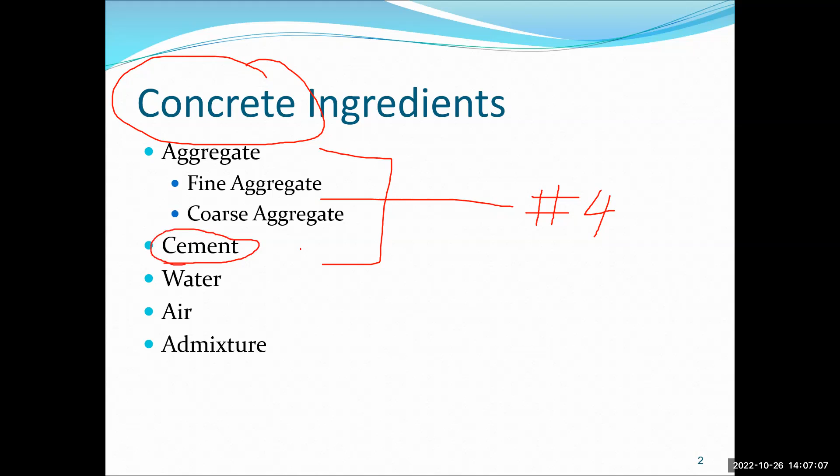But the next ingredient is cement. We can use Portland cement, and cement is the most expensive ingredient of the concrete. The reason for that is because we invest a lot of energy to produce the cement, not because the ingredient of cement is rare. No, the ingredient of cement is also available everywhere.

It is like a dirt cheap kind of ingredient. But the problem is that we have to invest, put on some energy to produce a chemically balanced material. So the money I'm spending on the energy transforms this ingredient into another kind of material that has somehow energy saved in the chemical composition of that material.

And guess what? Nobody pays money for water. Water is available everywhere, other than drinking water, and we are lucky here that we can get water from everywhere. It rains water, or we can dig in the ground and get water. So that's why this is also available everywhere.

Sometimes you can have air already in the mix, or sometimes what we do is add some kind of detergent in order to produce bubbles in the concrete. We call it an air entraining agent, an admixture to improve the performance of classical concrete in the face of weather, challenges, and pressure in the concrete to absorb pressure due to either osmotic pressure from icing, or hydraulic pressure from expansion of water in the concrete, or any alkali pressure or any kind of pressure. So the best way to handle this is to produce bubbles to absorb this kind of pressure.

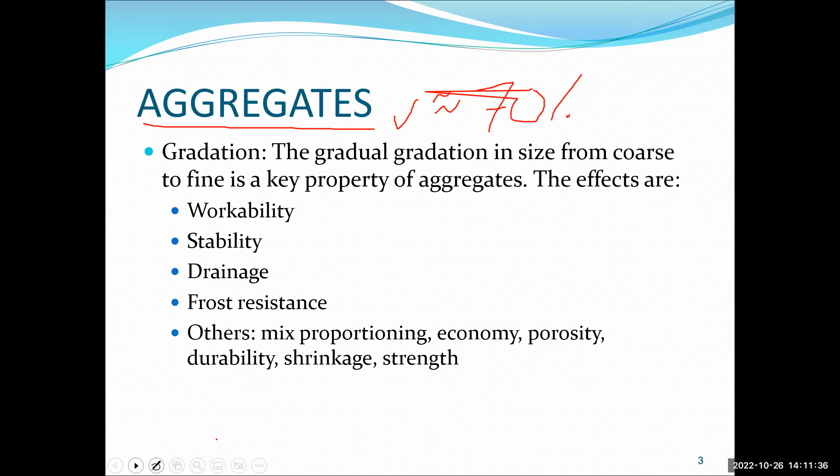The dividing line between coarse aggregate and fine aggregate is sieve number 4, meaning it has 4 openings per inch—each opening slightly less than a quarter of an inch. So this kind of proportioning between fine aggregate makes a big difference. In other words, in a mix design, most of the strength of the concrete comes from the contact of coarse aggregate to coarse aggregate.

About 80% of the strength comes from coarse aggregate to coarse aggregate friction. The fine aggregate contributes the rest, which is 20%. Now, if you have options in how much fine aggregate you can afford or use in a mix, try to be on the lower end of it.

That means do not exceed the maximum. To be on the safe side, use less fine than needed to fill the void. The reason is because overfilling causes damage to the concrete. You're already separating the coarse aggregate from each other, and you're minimizing the strength of the concrete, because too much fine aggregate reduces you to only 20% of the strength.

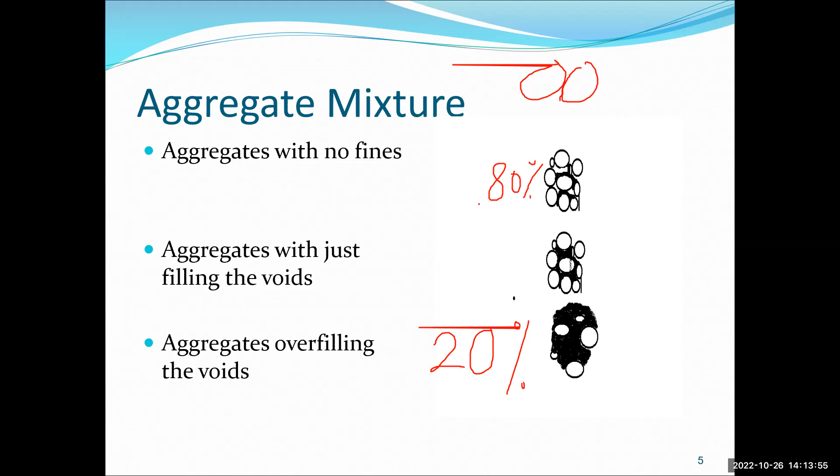This concrete that you produce with little or no fine is classified as well-drained concrete, a concrete that will survive under many internal pressures, such as hydraulic, osmotic, and other kinds of pressures.

Now, the best design mix is if you use fine aggregate enough, just enough to fill the void between the big particles, and that will give you 100% of the potential strength of the concrete. The key word here is: use fine aggregate enough to fill the void between the big particles. Less is not really good.

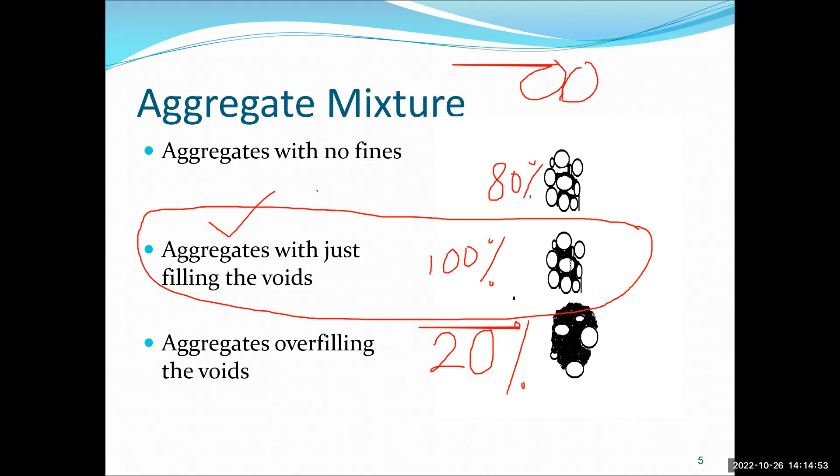More is not really good either. But to be on the safe side, less is better than more. This is something you probably want to keep in mind. This is a classical theory.

Now, another thing you probably need to look into is how freezing and thawing happens. The freezing-thawing cycle causes cracks in the concrete and accelerated damage because the aggregate itself has some pores in it. These pores get filled with water, and water expands approximately 9% to 10% of its volume when it freezes, unlike other materials.

When water wants to expand, it needs volume, it needs space. That's why, if the aggregate is fully saturated and doesn't have space, and this water is subjected to freezing, it's going to push against the paste, and that will create a crack. So the problem is if you have an aggregate here, and another aggregate beside it, and another one nearby, if there's pressure pushing against the paste, it will create a crack.

And if the other aggregate has the same kind of problem, these cracks will join each other. So we end up with cracked concrete all over, which causes rapid, accelerated deterioration of the concrete due to the freezing-thawing problem. The problem is water expanding when it freezes.

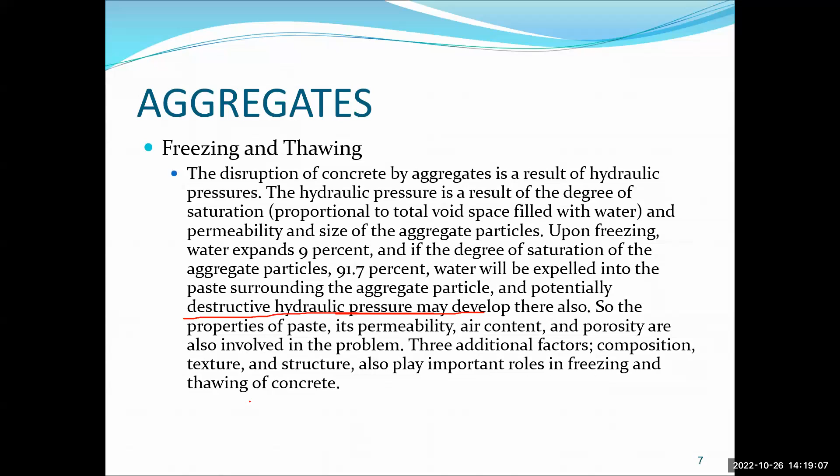Now, the next ingredient we said is the most expensive, because you're actually investing in the material ingredient of the cement by putting in a large chunk of energy. It's energy that's expensive here. Raising the temperature of the ingredient to 1500 degrees centigrade, or 2700 degrees Fahrenheit, is expensive.

What about the ingredient of the cement itself? It's available everywhere. You can make it if you want to, if you can raise the temperature to 1500 degrees centigrade or 2700 Fahrenheit. It is silica and lime. These are everywhere - the lime, which is calcareous rock, is basically made of calcium carbonate, which is the chalk that you see. It's available everywhere.

No one can monopolize that. You can find calcium carbonate, which is the ingredient for lime. Silica - you can go to the beach and collect it for free. If you put a handful of sand from the beach in your pocket, nobody's going to stop you and say you're stealing the beach sand, because it's free. It's not an expensive ingredient. You can also add clay to the ingredient of the cement - it will contribute the aluminum and iron content needed in the chemical composition of the cement.

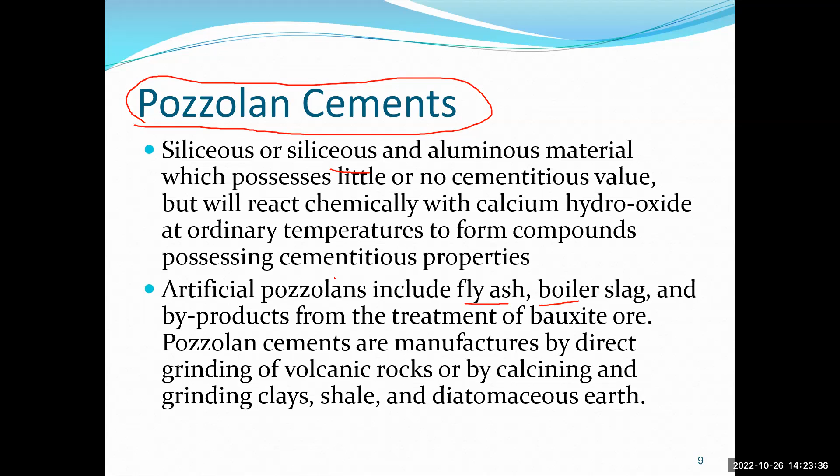Now, water is available everywhere, but we need to use water that's not contaminated - water that's applicable and useful to the concrete, not harmful to it. A rule of thumb says any water that has total dissolved solids less than 2,000 parts per million is safe to use without testing it.

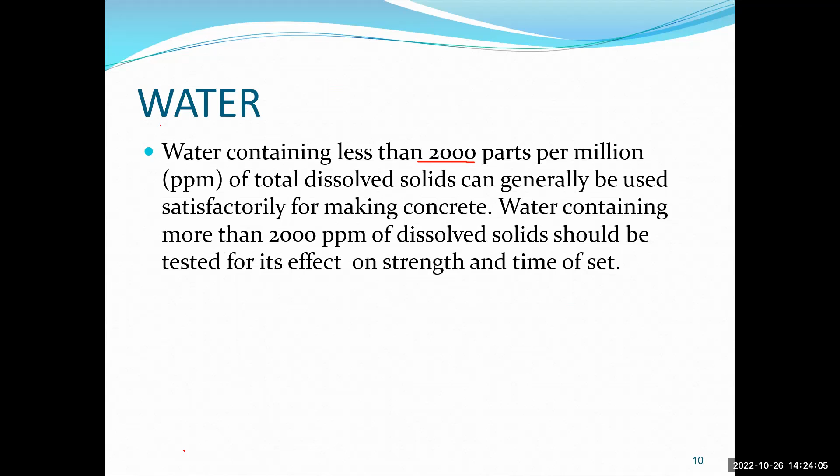Beyond 2,000 parts per million of water, you need to test it. In some countries we have plenty of water; in others, water is really scarce. People don't have water to drink, much less to use in concrete, so they'll resort to contaminated water sources. Now, tap water usually has total dissolved solids somewhere between 400 to 1,200.

Most likely about 600 to 700 total dissolved solids, and it is really safe to use tap water in the mix. Now, air entraining agent - remember when we talked about pressure inside the concrete, the classical solution for this internal pressure comes from providing air bubbles in concrete. How do you provide air bubbles?

Any detergent will do it, but we use industrial detergent, which produces many little bubbles. That's why it's recommended to use air entraining agent in case the concrete is subjected to internal pressure, like freezing and thawing. Freezing and thawing happens because water expands and increases in volume, producing pressure. That's why if you want to absorb the hydraulic pressure due to freezing water, add air entraining agent.

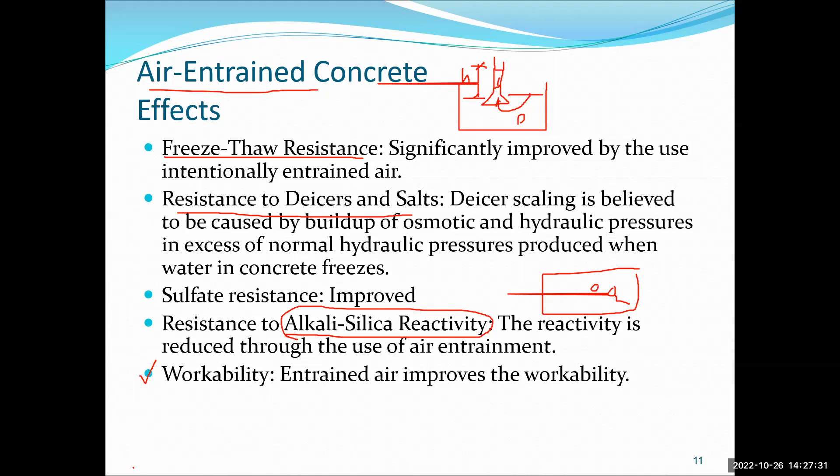You know why? Because you're actually adding detergent, adding soap - literally any detergent will do it. When you put soap in your hand, it becomes slippery, and that's why it becomes easy to work with. That's why it improves workability. So adding air in the mix improves workability and reduces the risk of accelerated damage to the concrete due to internal pressure.

Now we have admixtures, or additives, we can add to the concrete to improve its performance. One of the admixtures we talked about is air entraining agent - it improves durability in environments of freezing, thawing, icing from salt, and sulfate and alkali-silica reactivity. How do we use it? We use salt of wood resin, or you can use synthetic detergent, that will do it. Water reducing agent...

The reason we need a water reducing agent - in the classical school of thought, the water-cement ratio matters. If you plot water-cement ratio against strength, the more water you add, the less strength you have. So you need to use the minimum water you can live with, to reduce the water demand. When you reduce water demand this way, you're actually increasing the strength of the concrete.

Some examples we can use are lignosulfonate, hydroxylate, carboxylic acid - these are examples of the chemicals we use. Retarders, we need to slow down the setting time - we can use materials like borax, or any materials that will delay the chemical reaction. Accelerator is the vice versa - I need to speed up the chemical reaction, especially in cold weather.

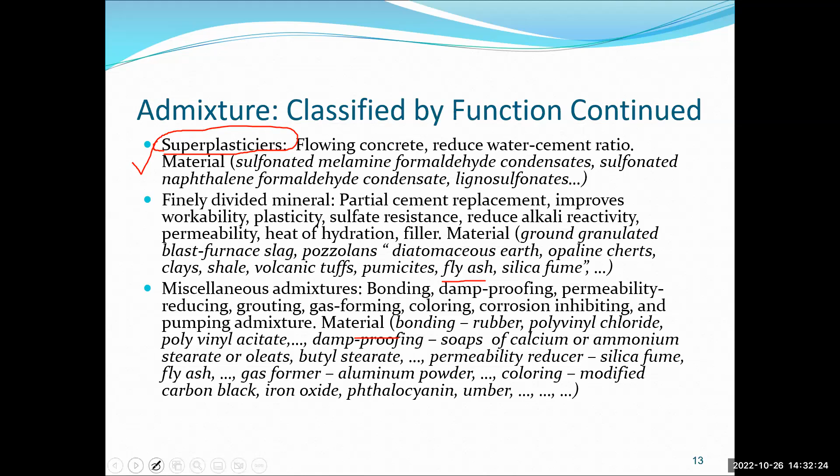Now we talk about fresh concrete. Once you have the ingredients ready to be mixed, you put them aside and start mixing. The thing you need to worry about is workability. Workability for fresh concrete is an extremely important property - how easy you can work with the ingredients, how easy you can transport the concrete, how easy to finish the concrete. We call this workability.

Workability is very critical because you need the concrete to flow in the forms, to wrap itself around the reinforcing bars, to reach every corner of the form without any problem. Otherwise, you'll have problems with the hardened concrete. That's why workability is very important, very critical.

Things that affect workability: water content. Definitely if you increase the water, what happens to workability? It will increase. But what happens to strength? The strength goes down. This is not good.

Air entraining agent improves workability because it's soap. If you increase the air entraining agent, what happens to workability? It will increase. Not only will it increase, but the strength will also be improved, the performance of the concrete will improve, and stability will be improved. That's why it is good to have air entraining agent in the concrete, according to the classical point of view.

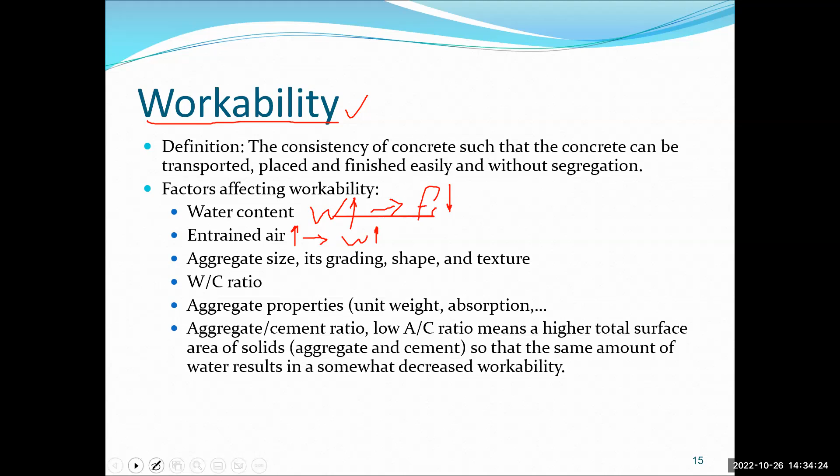Aggregate properties - unit weight, absorption, and aggregate cement ratio - all of these affect workability. How do we measure workability? Many ways, but the best and most common is the slump test. The rest you can see everywhere but they're not very common. Next would be the Kelly ball penetration test. The slump test is straightforward to do, and here's how we measure it.

This is a slump test. It is like an inverted cone. The diameter of the cone at the bottom is 8 inches and 4 inches at the top, and the height of it is 12 inches.

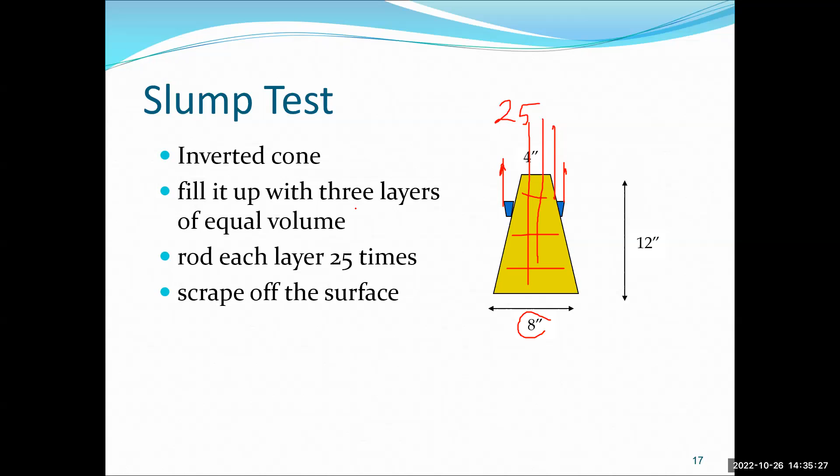So what you do in this case is fill it up in 3 layers and tap it with the rod 25 times. This is very common. So you fill it for the second layer and tap it with the rod 25 times. And you fill it with the third layer and tap it with the rod, in this case, 25 times. So at the end, you level the top and then pull the cone upward in 5 seconds. And then this concrete is going to slump, and that will give you a measurement of workability.

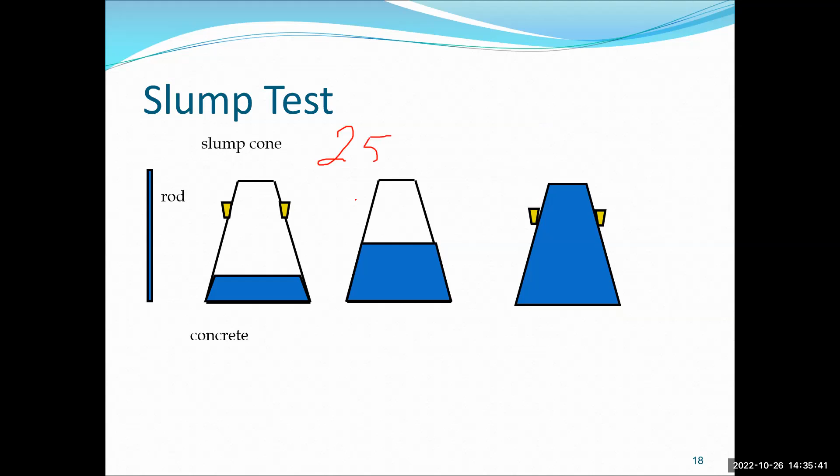That's how it looks like. See that? You put first layer, second layer, third layer, tap it 25 times each time. And then level the top and lift it up. Lift it up nicely and smoothly. And then what happened? You measure how much the concrete slumps. This is the slump measurement here.

Obviously, if the concrete is fluid, then it's going to slump more, right? If the concrete is rigid, it will slump less. Make sense? So that's why this distance that the concrete slumps is a measurement of the fluidity, the workability of the concrete.

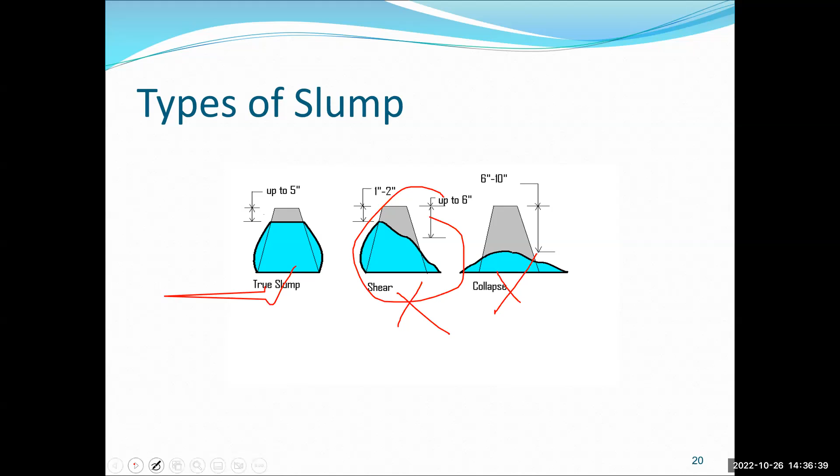Now, setting is the time the concrete sits and hardens because of the cement itself. What is this, the setting? It's a stiffening of the paste, because what happens is that the paste is going to bind the ingredients together - is it going to bind the fine aggregate with the coarse aggregate? That's why it is important.

Now, setting - there is a period for the chemical reaction, or the majority of the chemical reaction, the most significant chemical reaction of the concrete is, in this case, approximately 45 minutes without any additives. Make sense? With additives it will be different. So the concrete will sit and harden in 2 stages, we call it. The initial setting takes about 45 minutes to an hour somewhere,

with the concrete that has no additive in it. And the final setting is approximately between 2.5 hours to 3 hours. Do not agitate the concrete between initial setting and final setting. So you have 45 minutes to work with the concrete - form it, transport it, put it in the forms and so on, and create it, vibrate it, do whatever, in about maybe half an hour. Leave it alone for another 2.5 hours. Don't touch it, because agitating the concrete in this critical time will break the bonding, which is very delicate and vulnerable. Don't do it. So you need to stop.

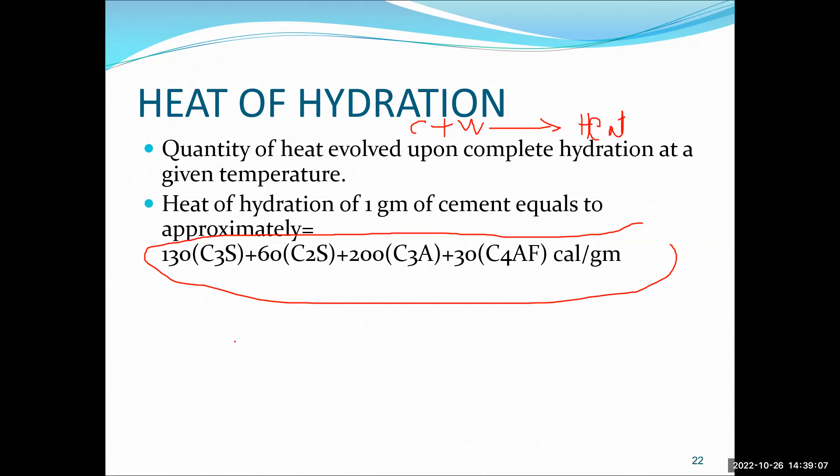And the heat of hydration - this is one of the best equations we use, in terms of calories per gram of cement: 130 calories per gram of cement for C3S, the main component of the cement, 60 for C2S, and 200 for C3A. But between these two, they are the major chemicals here - approximately about 80-85% of the cement.

Bleeding - concrete bleeds, and bleeding is healthy. Concrete is supposed to bleed. Bleeding means that you have a shiny surface on the concrete. If you see a shiny surface on the concrete, then the concrete is healthy and bleeding. Now that means it has not reached the final setting yet. This kind of shiny surface on the concrete tells you the time is somewhere between initial setting and final setting. Do not agitate the concrete or work with the concrete as long as you see a shiny surface on the concrete itself.

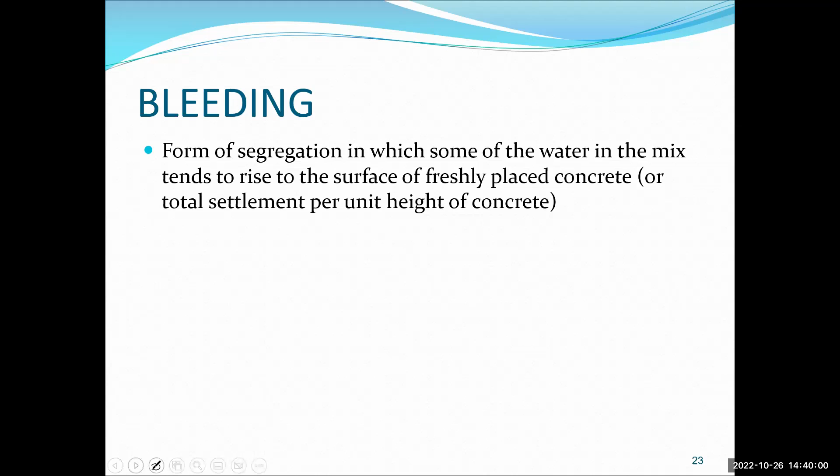Otherwise you'll be breaking the most vulnerable bonding that the concrete is doing. Here's what happened: you look at this bleeding surface on the concrete, there's some bleeding, like a layer of water and cement. This is the best layer in the concrete, this kind of layer between water and cement. Some of this water will evaporate and some will come back to the surface, mixed with very fine particles of cement. If it dries out, it forms the best protective layer to the concrete. So do not remix it, do not agitate it, do not disturb this bleeding layer.

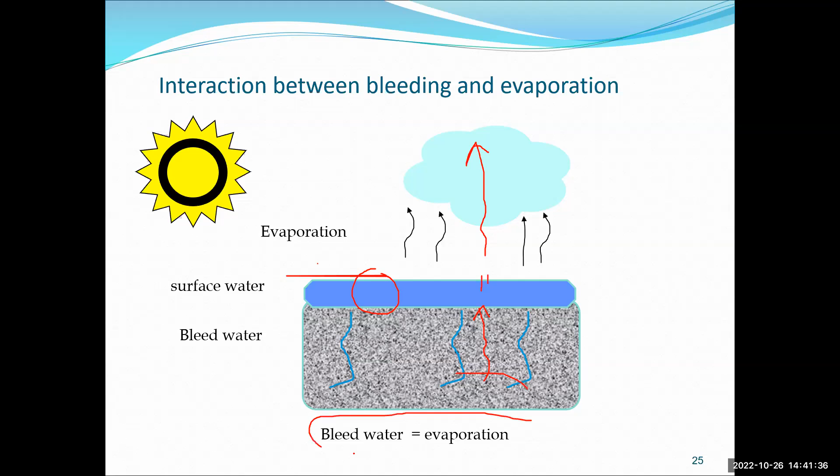So what you want to do is this: examine this layer. The best scenario is if the amount of water going in equals the amount of water you're losing due to evaporation, maintaining this thickness of layer until the end of the final setting. Once the concrete gains enough strength, they can work on the concrete after that. So whenever the bleeding water equals the evaporation caused by heat and temperature, depending on where you are, you're creating a perfect, strong protective layer on the concrete.

Now let's talk about mixing and proportioning of the concrete. Here's what we do in mixing it. Now you have the ingredients, let's work on mixing them. The thing you need to remember is, what is concrete? Concrete is a composite material.

We say composite because we make the concrete from different ingredients: the cement, and aggregate, which can be anything, sand and gravel. That's why it's composite, composed of the cement, or binder, the best binder we have nowadays, which you can find in hardware stores, is Portland cement, the star of cement. This is the binder, and the rest of the ingredients are sand, gravel, and water. So this is just to remind us these are the ingredients of how I make the concrete.

Now, hydration is a chemical action triggered by adding water. When you add water, the chemical action starts, and bonding starts between the ingredients of the concrete. This chemical action converts all these loose ingredients into a solid, man-made rock, bonding all the ingredients together. So this is the hydration process.

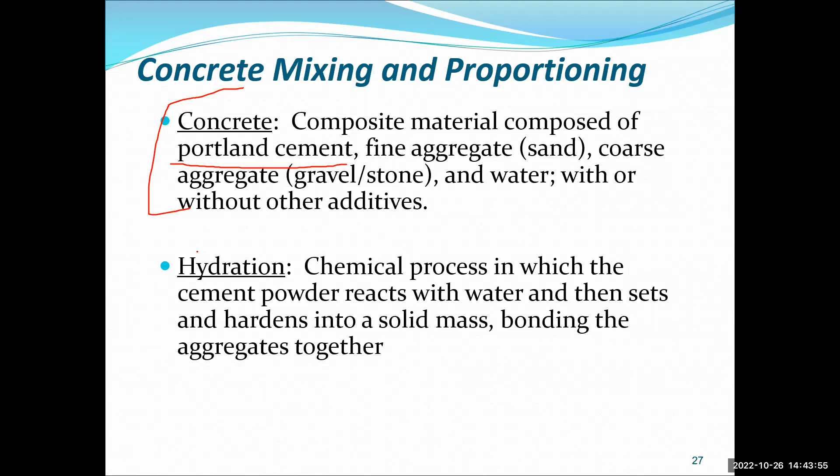A lot of people think it's a simple process, anybody can do it, just add water at room temperature, done. But yet it is a very, very complicated chemical action. It's not a simple chemical action, but it is a simple process.

Now, what we do in mixing is design the mix, to produce the best product at the very end, which gives you good strength and good durability. You design the proportioning of the ingredients: how much cement, how much sand, how much gravel, how much water, and mix them all together. You target the best mix design to come up with the best outcome, mostly targeting higher strength, because you build bridges and buildings out of concrete to take care of the loads on these structures.

You need higher strength, you need good workability, and you need the cost to be reasonable, to minimize cost, because you are in competition, and nowadays the competition is all over. In the past 25 years there wasn't much communication between the world; now we have good networking and communication, which makes competition very high. The demand to reduce costs and be more effective is very high.

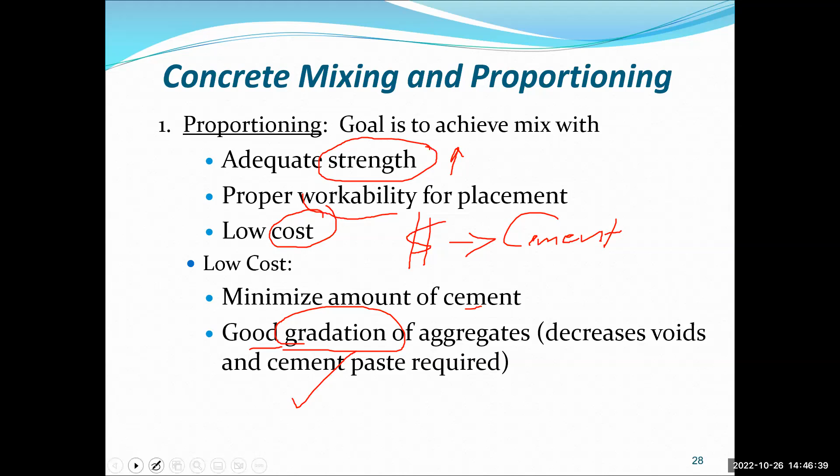So we minimize the amount of cement and make sure you have good gradation, because one of the trickiest ways to improve strength cheaply is to work on the gradation of the aggregate itself. That will give you the best kind of gradation.

Increasing the water cement ratio will increase plasticity and fluidity, but it reduces the strength due to larger voids. Not only larger voids, but also because of too much excessive water in the concrete, and any excessive water left in the concrete does nothing but damage, damage, and damage.

Remember that. Here's a secret: in normal circumstances, for the hydration process, you need approximately a water cement ratio of 0.23. Okay, that's the water cement ratio needed.

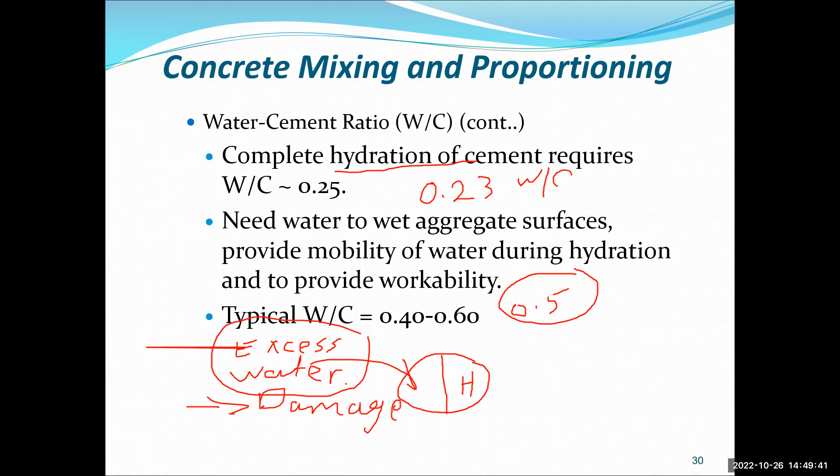So the tricky part is how can we reduce the excess water to improve the strength of the concrete? Keep that question in mind. We're trying to reduce excess water, reduce shrinkage and shrinkage cracks, increase the strength, and at the same time reduce the voids in the concrete.

So in the design of concrete, you have a major principle to worry about: quality. You need quality concrete, because when you mix it, you target the quality. Get the best mix that gives you good quality, good workability, and low cost. These are the major targets when designing the mix and proportioning the ingredients. Keep in mind these are the three things you have to have.

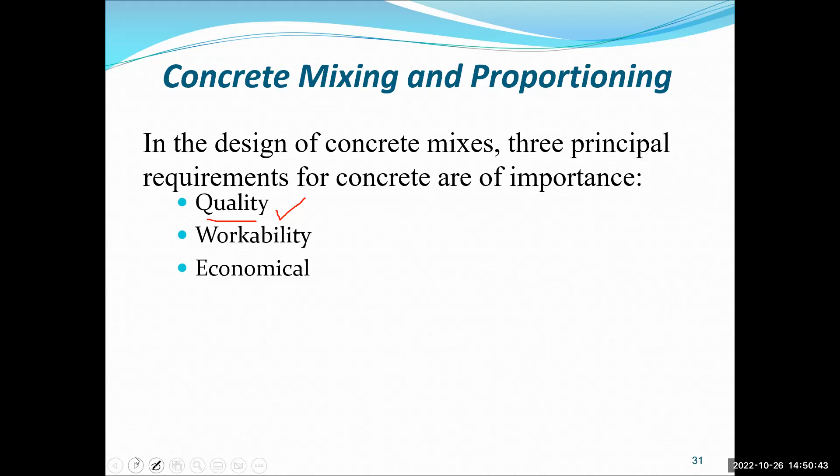Now we talk about, once you mix it, the hardened concrete. Now the concrete sits and hardens. What you want to do is look at the properties of the hardened concrete. The major property of hardened concrete is the strength. You need a stronger concrete, so we need to test it in terms of strength.

All kinds of strength: compressive strength, shear strength, tensile strength, flexural strength. You want to make sure the final product is strong enough to take care of the loads on the concrete. Elasticity, water tightness, resistance to destructive agency, volume changes, creep, extensibility—all of these are important properties when we deal with hardened concrete.

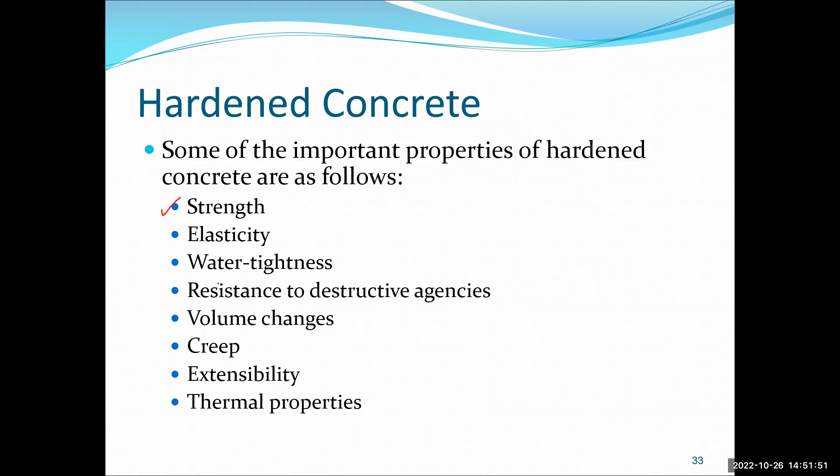Now, when it comes to strength, compressive strength is number one, and probably the only one we are obliged to test—the only one required by code is the compressive strength, which we call FC prime. FC prime is basically the maximum load a cylinder can take over its area.

So what happens is we take cylinders—normally standard cylinders that are 12 inches high and 6 inches in diameter. This is the standard cylinder size we use for testing.

Now what happened is that we started using this 6 by 12 cylinder, but most DOTs now use 4 by 8.

Take this cylinder, put it in a machine, and apply load on the cylinder. It's going to break most likely by shear. This is the maximum load it can take. If you take the cross-section area here, then FC prime, the compressive strength, will be this maximum load over the area.

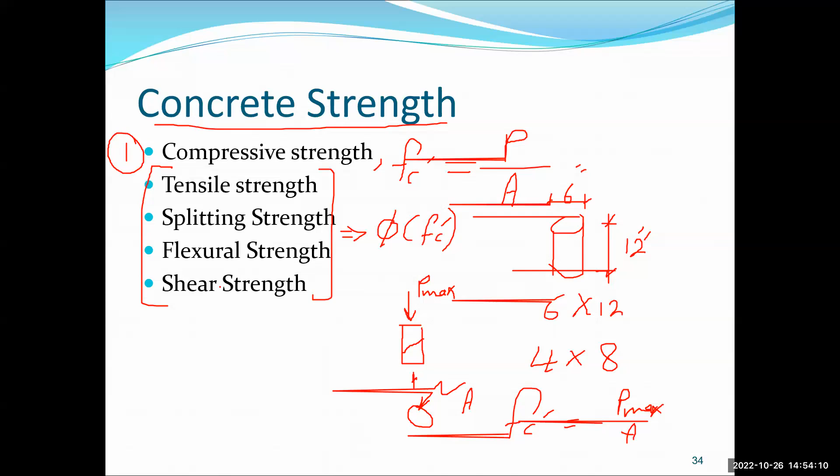Now the tensile strength is also needed. Tensile strength, splitting strength, all of these are expressed as a function of FC prime. So once you know FC prime, you can tell the tensile strength, splitting strength, and other kinds of strength.

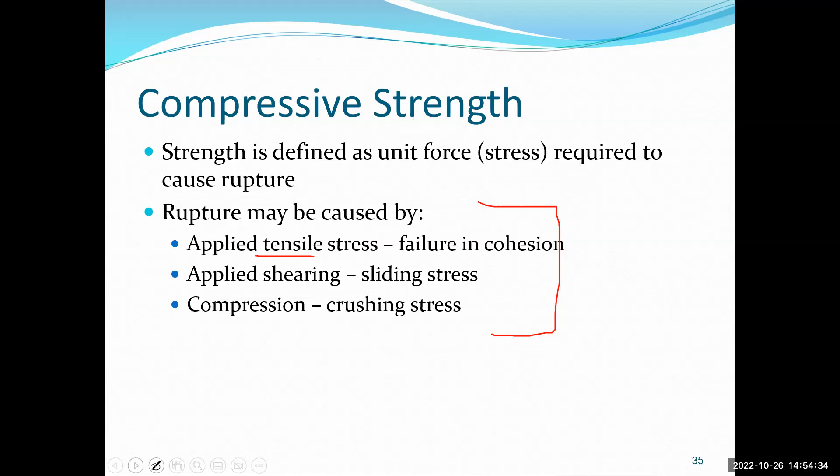Now, the compressive strength - if you put the sample in a machine, there are 3 typical modes of failure. One is failure due to cohesion, like tensile stresses, or shear, or compression - the way it breaks. In tension, if you put the sample in a machine, the failure will be like a load this way. For shear, the failure will look like a cone, like this. And for compression, of course, crushing.

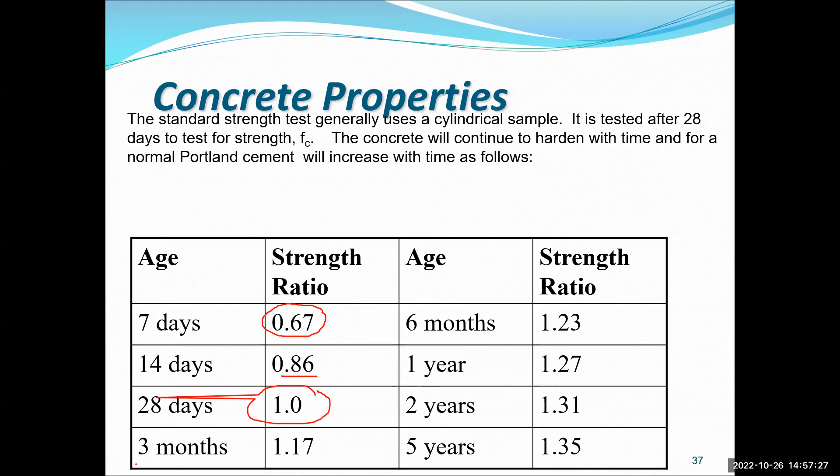Now, look what happened. From 6 months to 1 year, it only gains 4.04% or 4%, right? So we can tell the rate of increase in strength reduces with time substantially. But theoretically, we can say that concrete gains strength forever. That's how it looks - it gains strength very sharply at the very beginning.

Then the rate of increase decreases, and becomes almost flat, but theoretically, the gain in concrete strength will be infinite. The concrete will gain strength infinitely as long as it's not subjected to harmful chemicals or harsh conditions.

Now again, we express the tension, the shear, all of this in terms of the compressive strength. And as a rule of thumb, the compressive strength of concrete compared to the tensile strength - rule of thumb, tensile strength is 10% of the compressive strength. See how weak concrete is when it comes to tension? Concrete is extremely weak when it comes to tension.

Extremely weak, very low percentage, according to the formulas you can find in codes and other literature. The tensile strength is expressed as 5 times the square root of FC prime. This is one of the best formulas to relate the tensile strength with the compressive strength.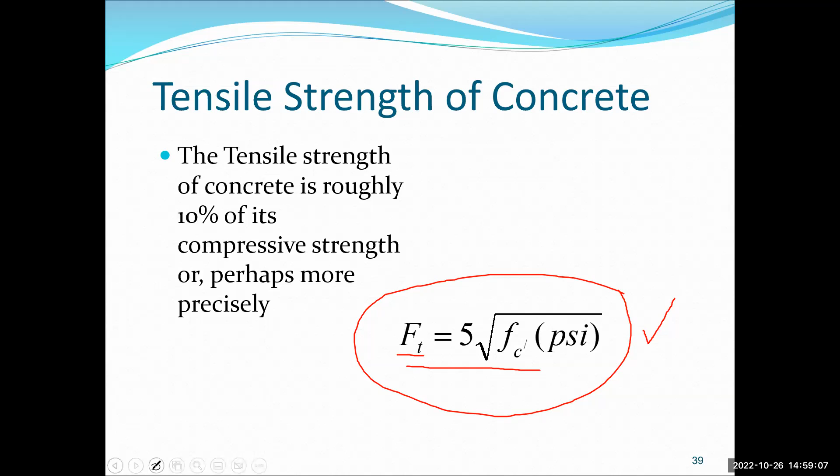Now, when it comes to the flexural strength, what we do is use it in a beam. If you have a simply supported beam like this and you load it, the top will be subjected to compression and the bottom will be subjected to tension. So that's an indirect way of measuring it.

This is the neutral axis here. So this is an indirect way of measuring the strength of the concrete. This is the concrete in compression, and this is the concrete in tension.

Now once the concrete beam breaks, subjected to this kind of loading with one load or two loads, it's going to crack here. That means it reaches failure caused by tension, and this tension is what caused the crack or failure. We call it modulus of rupture.

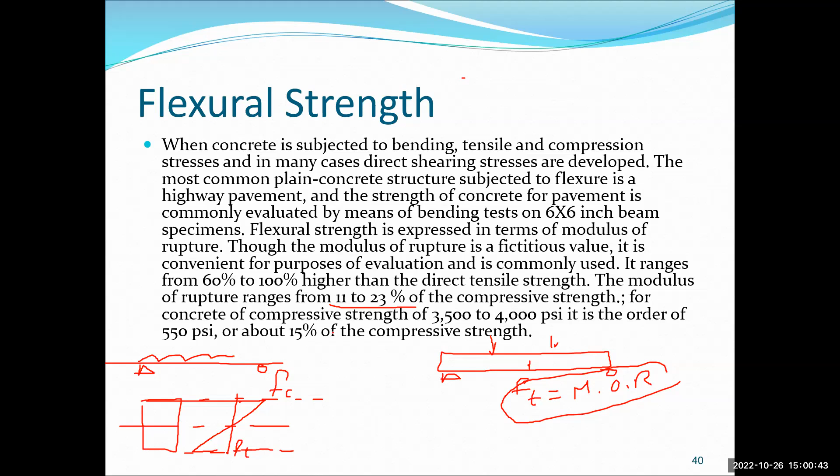Modulus of rupture is a tensile, indirect measurement of the tensile strength of concrete in flexure. It's approximately 11 to 23% of the compressive strength. According to ACI, the flexural strength of the concrete is approximately 7.5 times the square root of Fc prime.

The setup of the experiment is as follows. We apply a load P, which will be P over 2 on both sides. Now if you do some derivation, the tensile strength will be MC over I, and C for the concrete will be equal to H over 2.

The moment of inertia I in this case will be equal to 1/12 of the width times BH cubed. If you put this all together, you end up with the modulus of rupture FR equal to 6 multiplied by the moment. The maximum moment for this scenario would be equal to PA/2, where A is this distance here.

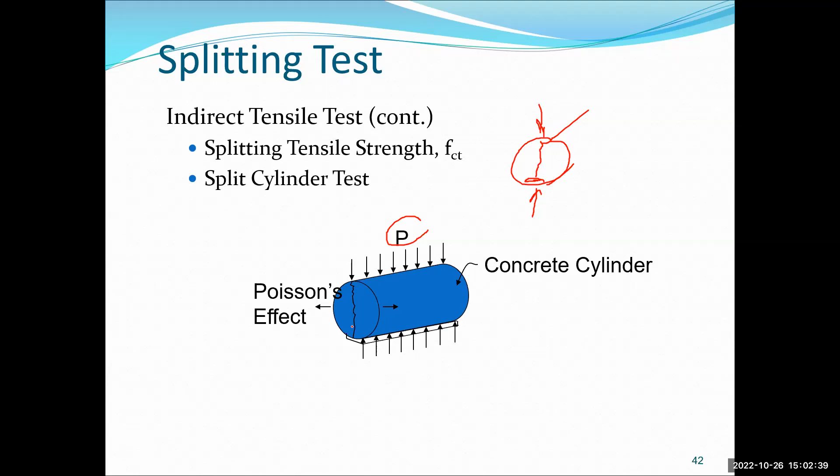Now there's another indirect way of measuring the tensile strength, where you put the cylinder on its side and apply a linear load. According to Timoshenko, this will fail by the Poisson's effect. You have the cylinder here, exactly like a watermelon: if you push with a compressive force, the watermelon goes into tension. Part of it will be in compression, but most of it will be in tension. That's why the cylinder breaks very nicely, almost in the middle, and splits. That's why we call it splitting strength.

According to Timoshenko's derivation, the splitting strength here is 2P over pi LD, for a standard 6 inch by 12 inch cylinder. The length is 12 inches and the diameter is 6 inches.

Now according to studies and research, the splitting strength of the concrete expressed in terms of Fc prime is approximately 5 to 7 times the square root of Fc prime, most likely equal to 6.7 square root of Fc prime. Notice that Fc prime is expressed in terms of PSI.

Shear strength is another strength that we target, when two planes that are parallel and equal have a tendency to slide relative to each other, and that will cause shear in the concrete.

Shrinkage and creep are of course one of the major problems of concrete. It shrinks because it loses moisture, and losing moisture leaves voids, which is why it shrinks. Shrinkage is due to water loss to the atmosphere. Plastic shrinkage occurs when the concrete is still wet, and some of the water is used for the hydration process.

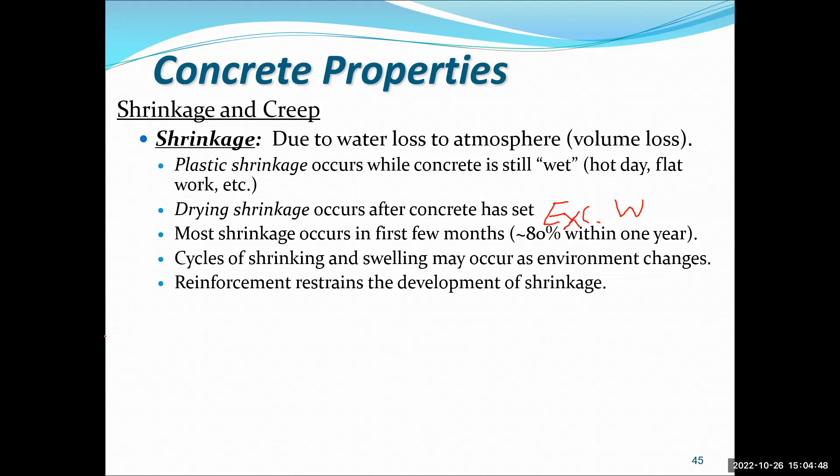When the excess water is leaving, most of the shrinkage happens in the first few months, about 80% within 1 year. The cycle of shrinkage and swelling depends on the moisture content in the concrete. You want to reduce shrinkage as much as you can, because shrinkage is one of the major causes of cracks, so it is not a healthy property.

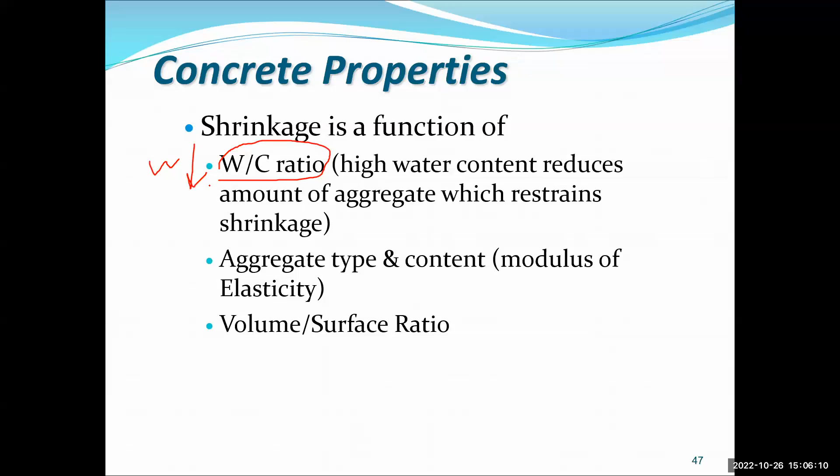It's not healthy to have a concrete that has a high percentage of shrinkage, so you want to reduce shrinkage as much as you can. To reduce shrinkage, you need to reduce the water cement ratio and reduce water. You need to use aggregate content with low modulus of elasticity, which in this case has the least absorption. You also need to consider the volume to surface ratio, which will reduce the amount of shrinkage. Shrinkage is not something we can tolerate very often, because it's a major source of crack generation, producing unsightly cracks that cause defects in the concrete.

Shrinkage is also a function of the type of cement used. Sometimes we don't question the cement type, whether it's certified as Portland cement Type 1, but shrinkage is related to it because hydration involves absorbing or using water in a chemical reaction, making cement a major factor. The admixture used is also significant, especially superplasticizer, which reduces water demand. Reducing water demand reduces the amount of water, which reduces shrinkage. Typically, strain due to shrinkage is between 200 to 600 micro strain, which is a big amount.

When it comes to shrinkage, sometimes we have drying shrinkage for slabs and concrete. The top surface dries faster, and if it dries faster, the top will curve upwards. For a slab on grade, this means it loses contact with the ground, and when the tip is subjected to load, it will create a crack on that side. This is what we call a moisture gradient.

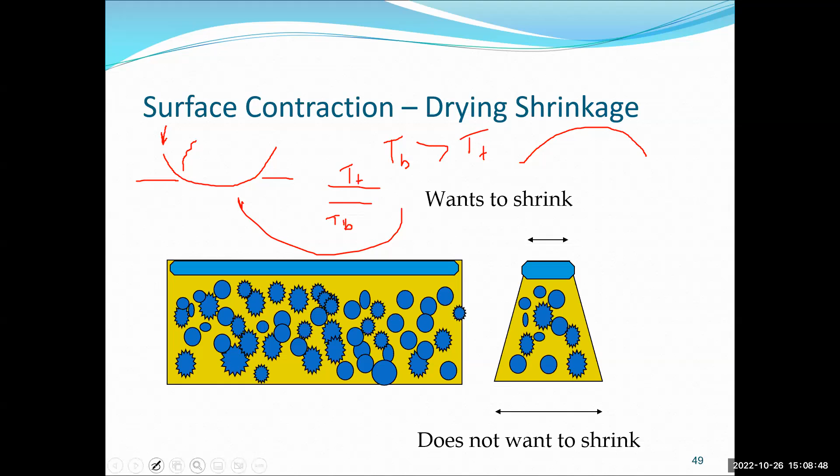This is typical shrinkage - the concrete loses moisture. Sometimes if you restrain the shrinkage, that creates cracks and unsightly cracking. That's why we need to control where the cracks are going to initiate. The best way to do this is to not restrain movement of the concrete beams or concrete slabs.

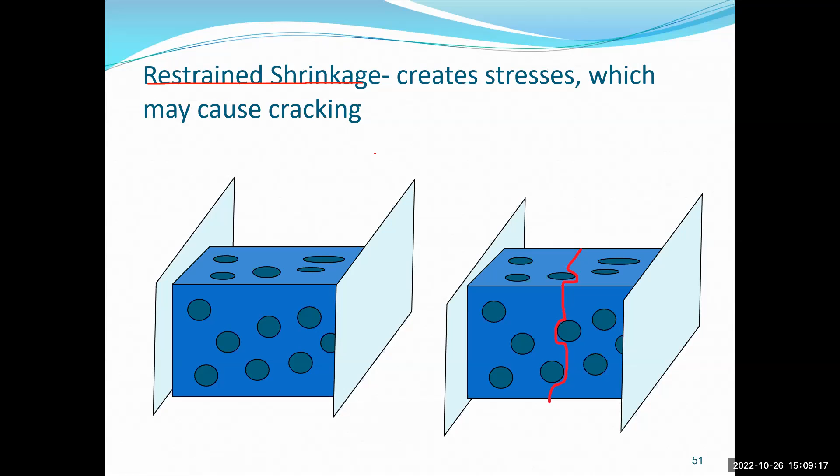Here's another example: with restrained shrinkage, you see parallel cracking approximately 8 to 10 feet apart. This happens because you are not providing the concrete the freedom to move. If you restrain it, you start creating parallel cracks approximately 8 feet apart. That's why when we cast a slab on grade, we put plastic sheets on top of the gravel, which minimizes the contact and bonding with the aggregate.

Now let's talk about defects of concrete. A major defect is cracking, whether due to load or due to losing moisture from shrinkage. One thing we need to worry about is reducing the amount of cracks, which requires designing the mix properly and designing the concrete members properly. But cracks result in many different ways.

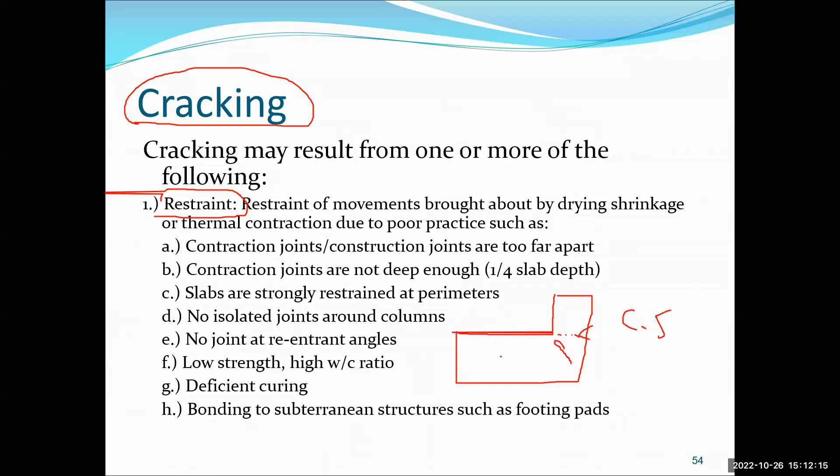Now, because of thermal expansion and contraction, you have to worry about these things. For example, if you're casting a slab that looks like this, notice that if you do not make some kind of construction joint, the concrete will crack this way. Makes sense? That will be unsightly. Now, if you have a column in the center here, and you do not have a joint there either...

Then the concrete will, in this case, crack around it, because the concrete bonds to the column. Of course, if there's a wall here, for example, if you do not make a separation or isolated joint here, because you have to make isolation at the column, isolation here, then the concrete will bond and cause a crack at the side.

So if construction joints are too far apart - sometimes what happens with slabs, you have to make them approximately 20-25 feet apart. If not, the concrete will create its own kind of crack.

Contraction joints are not deep enough. Sometimes in concrete slabs we don't cut the slab all the way to the bottom. We cut it approximately 1/4 of the depth. If this is H, we cut it H/4, right? And that will eventually crack like this. So at the top, you see a clean, nice cut, and that's how we control the cracks in this case. The slabs are strongly restrained at the perimeters.

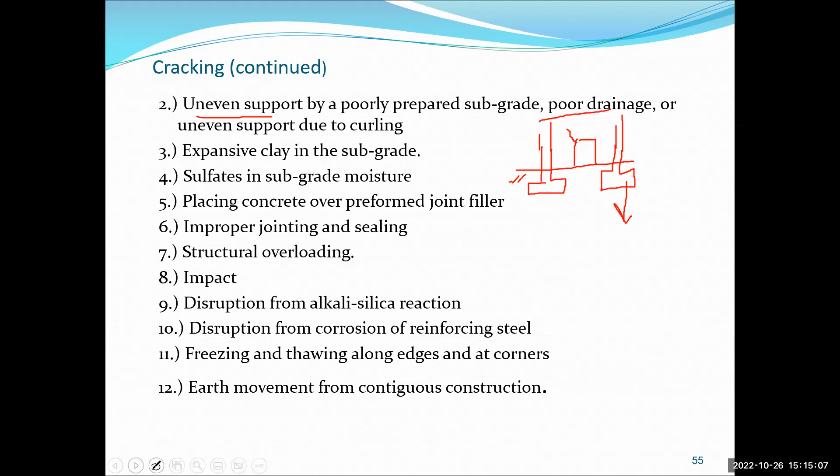Other kinds of cracks generated in concrete could be due to uneven support by poorly prepared subgrade, and this is very common in structures. If you have a foundation that looks like this between two columns - I'm trying to draw it here - obviously they have doors and windows. What happens is support settlement somewhere here. If this settles, then it's going to create a crack in that direction around the corner, right? Expansive clay is also a force that can uplift and bring down the structure.

We have sulfates, improper jointing, and impact, and all of these can cause some cracking. So the other kind of defect we call map cracking. Map cracking is about maybe 3 millimeters deep. It's not really major, it's really unsightly mainly, and you can see it whenever the concrete is wet - it looks random.

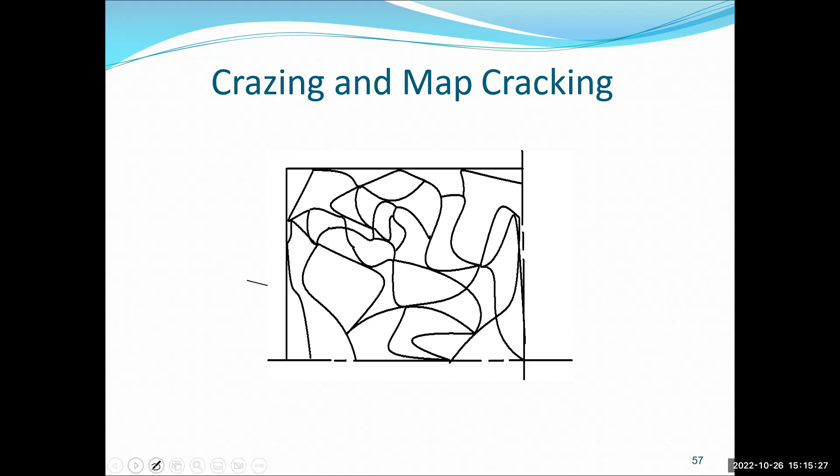The cause of it is poor or inadequate curing, or too wet a mix, or finishing while the bleeding surface, the shiny surface, is still there. Or some people, which is a very, very unhealthy practice, sprinkle cement - they put new cement on top, sprinkle cement and add water to mix it up and make it easier. This is a big no, it will create a problem. And carbonation - whenever the concrete is fresh, if carbon dioxide or carbon monoxide is mixed with the water, that causes carbonic acid and causes this kind of mapping.

There's also another kind of defect we call crazing. You reduce the effect of it by not sprinkling or troweling water, not sprinkling cement, and not performing finishing before the bleeding water is dried out. Do not overwork it, do not allow the curing to be interrupted, and allow the wetting and drying stages.

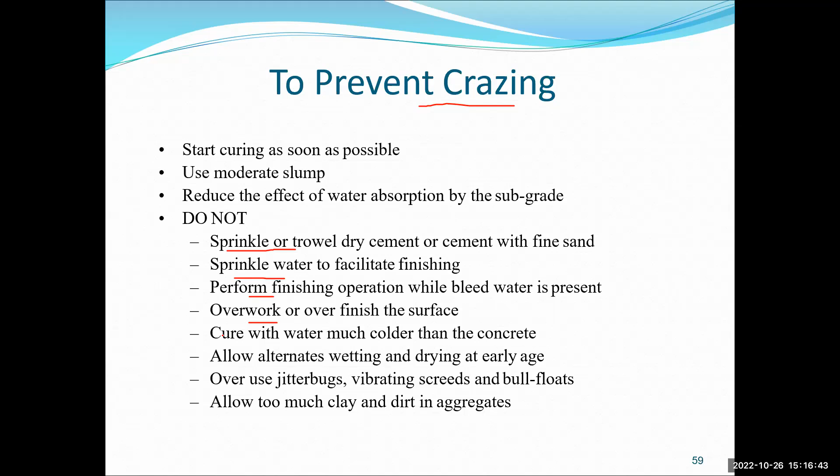So these are the things you probably need to worry about. Dusting - the causes of dusting: if you rub your finger or thumb against the concrete and feel it full of dust, this is because of dusting, where some fine particles are not bonded in the concrete because of an overly wet mix at the very top, or from disturbing the bleeding surface. Remember we talked about the bleeding surface at the top - if you start disturbing it, you end up with dust at the top, from using too much dirt or clay.

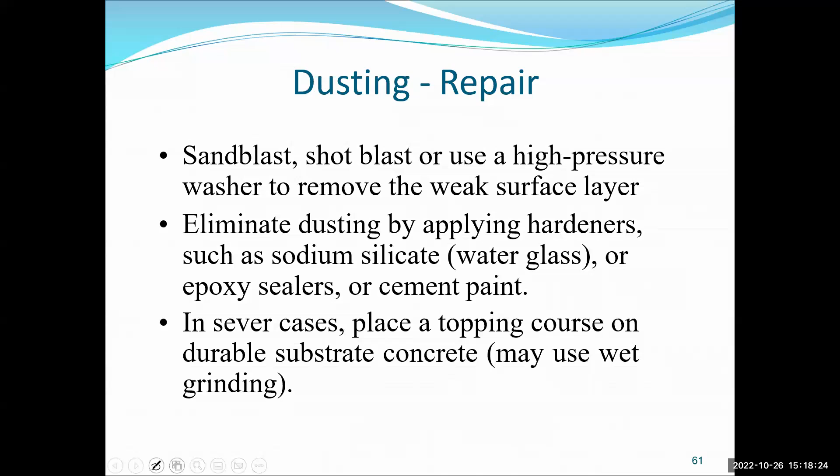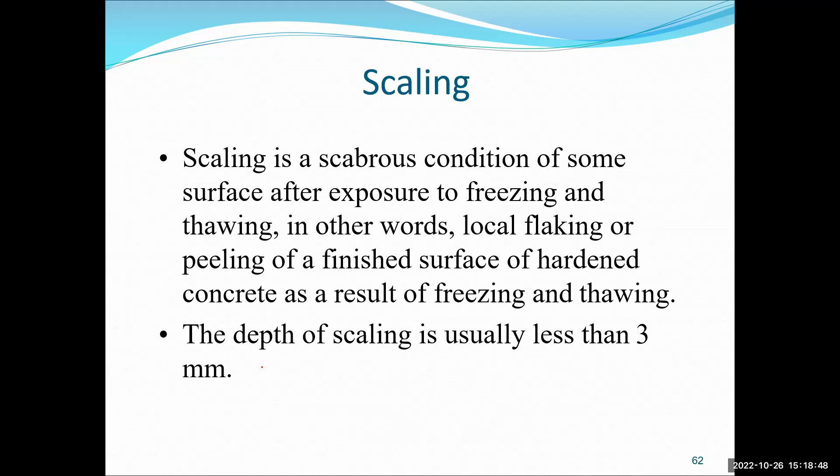Scaling is a scabrous condition of the surface after exposure to freezing-thawing problems. Basically, you can see circles of chips, exposing the aggregate itself due to the freezing-thawing inside the concrete. It is usually a very thin layer of the concrete chipping off. You can see it if you look down on the walkway - a lot of it in this case.

The cause of scaling is using non-air-entraining agent, because the air-entraining agent absorbs this kind of water pressure in the concrete, excessive amount of calcium or sodium chloride, improper finishing while the bleeding water is still on the surface, insufficient curing, and inadequate thermal protection. These are what cause scaling.

To repair it, what you're going to do is clean the surface and apply a bonding layer, which could use Portland cement, or use latex modified concrete resurfacing, or polymer modified cementitious material to repair it.

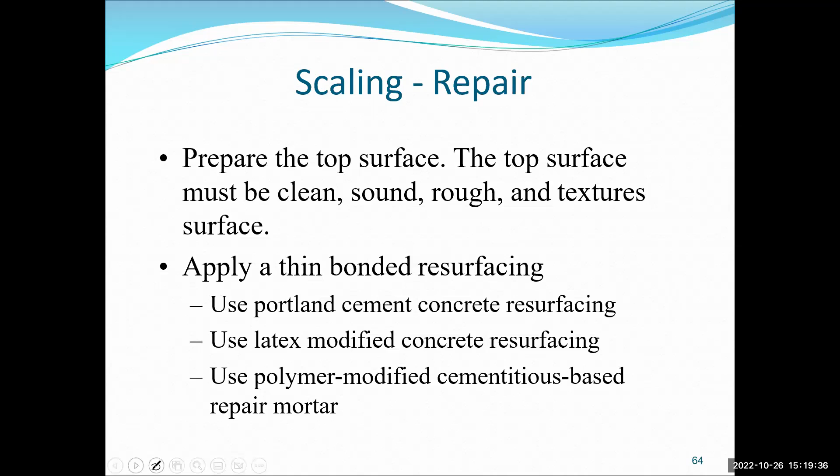Now, pop-out is not really unhealthy, but it is unsightly because of internal pressure. What happens is there will be aggregate here. The main cause of it is alkali aggregate reactivity, which causes some kind of internal pressure.

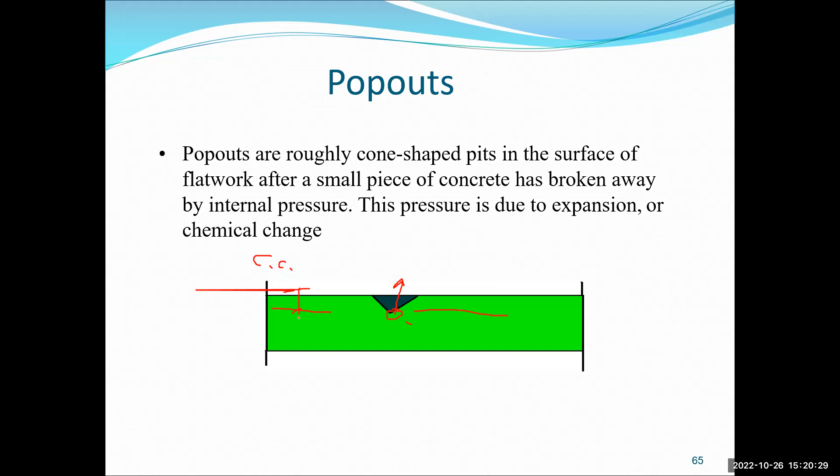This happens whether we have aggregate here, or whether you have reinforcing bars too close to the surface, where the concrete cover is very thin. Then, because of the movement of the steel reinforcing bars contracting and expanding, this causes pop-out. So this pressure is due to expansion or chemical change, either from the aggregate itself or the expansion and contraction of reinforcing bar in the concrete.

Usually between half an inch to 2 inches, they do not really diminish the value or strength of the concrete, but it's usually unsightly.

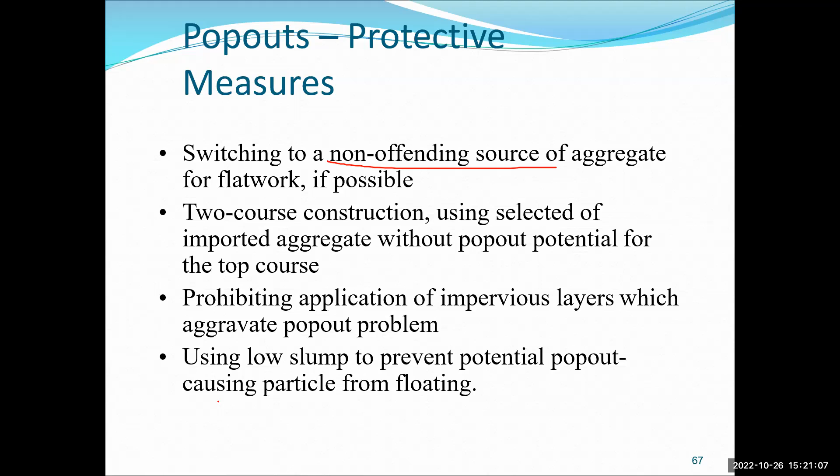To protect from pop-out, use a non-offending source of aggregate, because the aggregate is what has the chemical reaction we call alkali reaction. You could use two courses of construction, using selected imported aggregate, prohibiting application of an impervious layer, and use low slump, meaning high strength concrete that has good resistance for popping.

Blistering is exactly like blistering in the skin. There's a dense layer here at the very top, created from the bleeding water. The water is going to evaporate and reach the surface, but it has no room to go, so it gets trapped, applying pressure and causing the surface to go convex. We call this blistering.

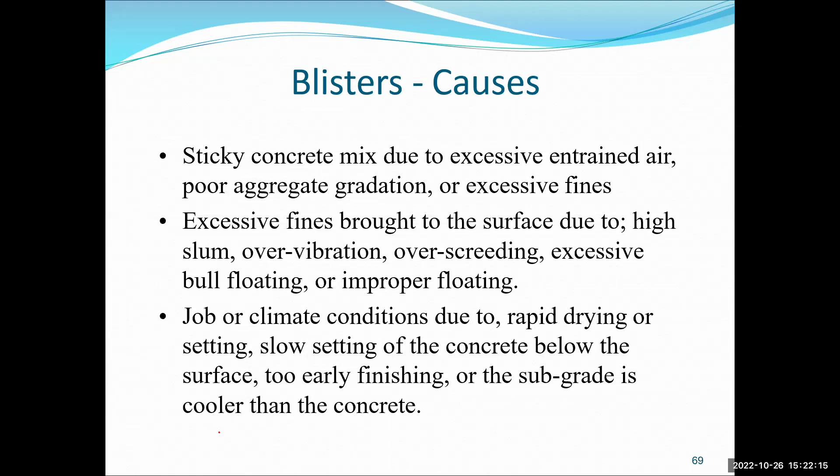The causes of that are obvious. Sometimes you have a sticky kind of mix at the top surface due to excessive entrained air, or excessive fines - the very fine particles fill up all the gaps, making the top surface completely impervious. Some people overwork the surface with the jitterbug or in finishing, which makes it very dense. These are the things that may cause it.

Now, spalling is a serious problem. Spalling is a big chunk of concrete that becomes detached - it somehow breaks off, exposing the reinforcing bars.

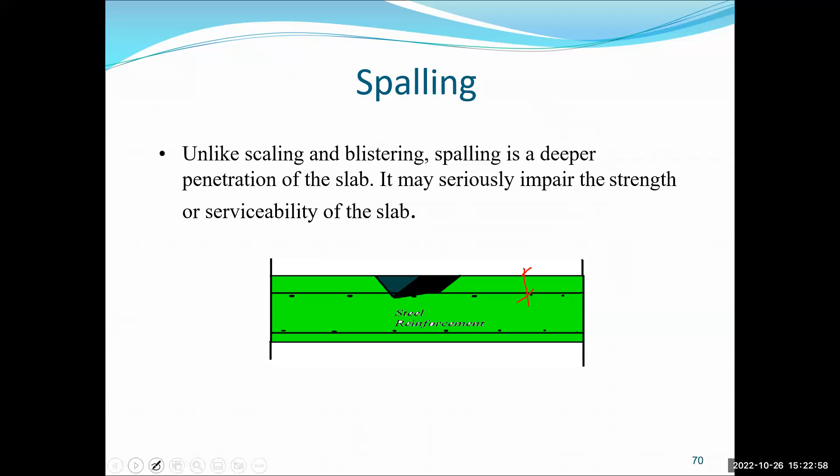Once you expose the reinforcing bars, they become vulnerable. The reason we like to put a layer of concrete around the reinforcing bars, even though this layer may not be needed for strength, is to cover and protect the reinforcing bars from corrosion. If not protected, the steel reinforcing bars will corrode. The reasons include insufficient depth of concrete cover, inferior mortar and concrete, and poor bonding, which may cause this kind of problem.

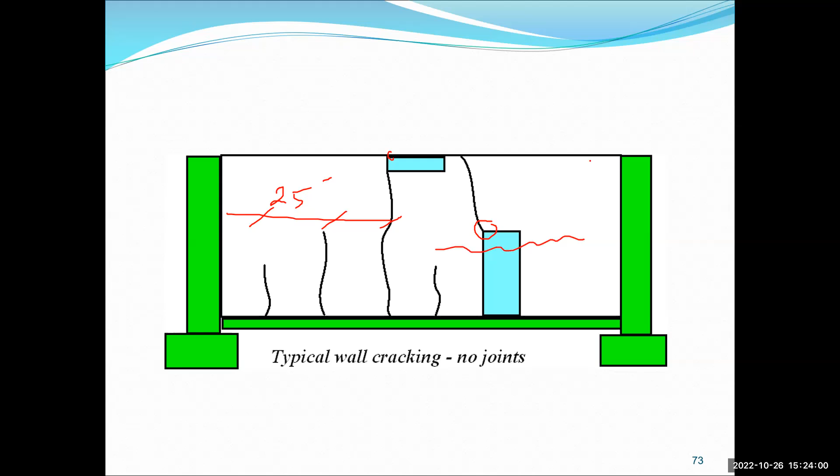For the basement, there are a lot of cracks, either due to drying shrinkage or settlement of the supports, or sometimes structural cracks due to the backfill behind the basement wall. Most of the cracks you find in a basement are due to improper joints, where you do not have a construction joint. This is typically how we see cracks in the basement. Notice that at each corner opening there will be some cracks, because there's not enough support. In this case, they are more or less 20-25 feet apart, without proper construction joints, and sometimes you get horizontal cracks due to the pressure from the soil behind the basement.

To fix it, you have to use uniform support and concrete placed at moderate slump, meaning high strength concrete. You need proper construction practice to improve the performance of the concrete, including drop height, formwork, and waterproofing, and control the construction joints somewhere between 20 to 30 feet. Backfill should be carefully done by design, and so on. If you follow all these rules for the basement, you'll produce a good basement.

This slide tells you about some chemical materials that are harmful to concrete. One of them is carbon dioxide, a gas that is harmless to concrete by itself. But once it dissolves and becomes carbonic acid, it slowly dissolves the concrete.

The way to protect concrete is to provide some surface protection or protective coating. Carbonic acid we already talked about. Garbage has all kinds of chemicals harmful to concrete, causing slow disintegration of the concrete.

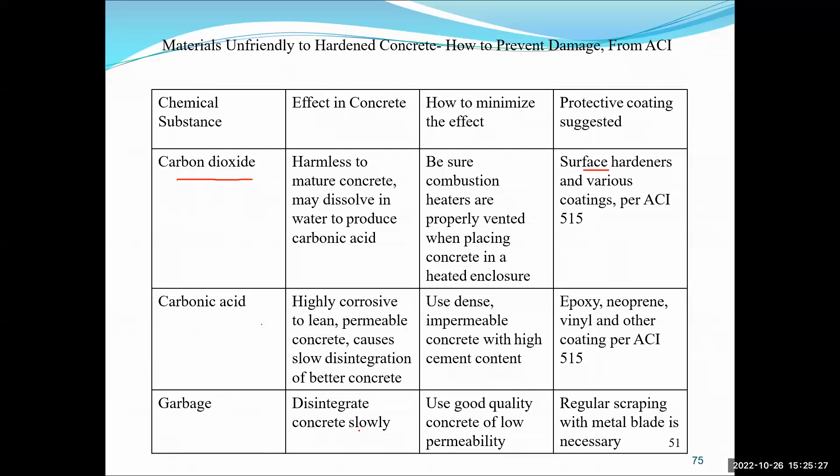To protect it, you also need to put some kind of coating on the concrete. Gasoline is not really harmful to concrete whatsoever, so if you spill gasoline on hardened concrete, it shouldn't have any effect.

Lactic acid slowly disintegrates concrete, and it comes from milk, because the acid slowly disintegrates it. The best way to protect against it is to coat the concrete with plastic coating or epoxy. Fresh milk has absolutely no effect on concrete, but when it becomes decayed and sour, that sourness is lactic acid.

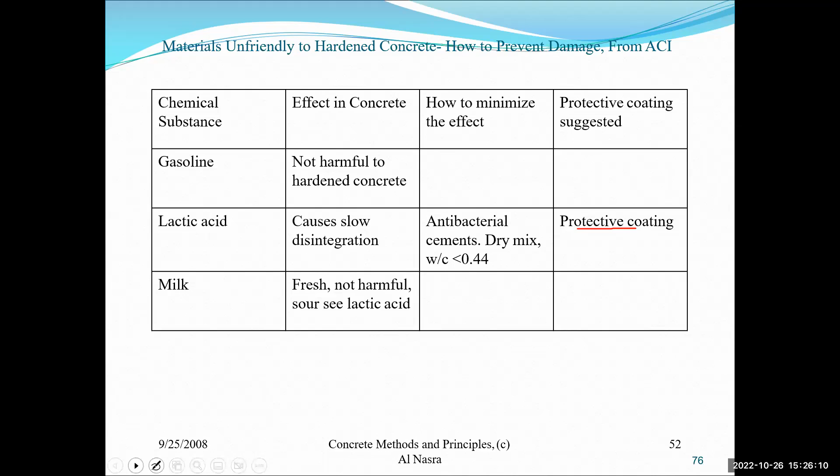Another kind of problem is nitric acid, which is a solution. If it's a strong solution, it will cause disintegration of the concrete. You can use a protective coating to prevent this.

Seawater has no effect on plain concrete. But when we talk about reinforced concrete, because seawater has a high content of salt, it causes corrosion to the reinforcing bars. To better protect these bars when subjected to seawater, you need to increase the concrete cover, from say 3 inches to 5 inches or 7 inches.

Vinegar acid does the same thing as any other acidic material. Sewage has mostly all kinds of harmful chemicals, including the most dangerous one, sulfuric acid, which causes disintegration of the concrete. To protect it, you have to isolate the concrete from this sulfuric acid using a bituminous asphalt layer or epoxy.

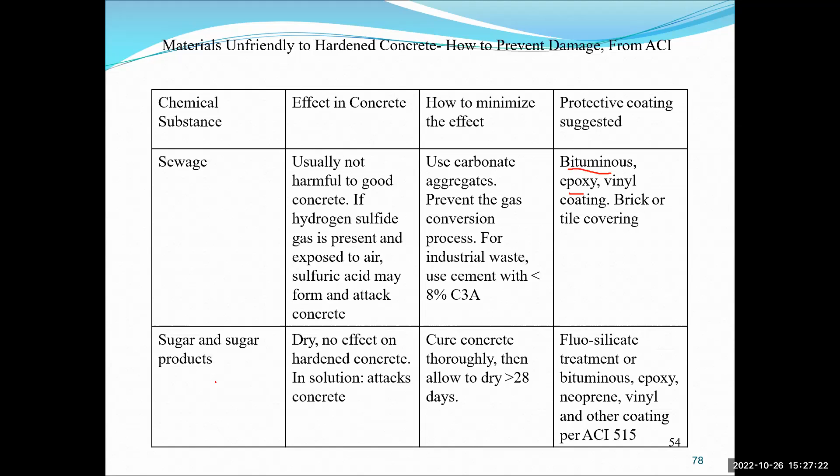Sugar, if dry, has no effect on concrete, but when it's in solution, it may become an acidic material. Now let's talk about concrete in the past, the present, and the future. Let me show you a few pictures to make you feel that concrete is truly that majestic material we've been working with.

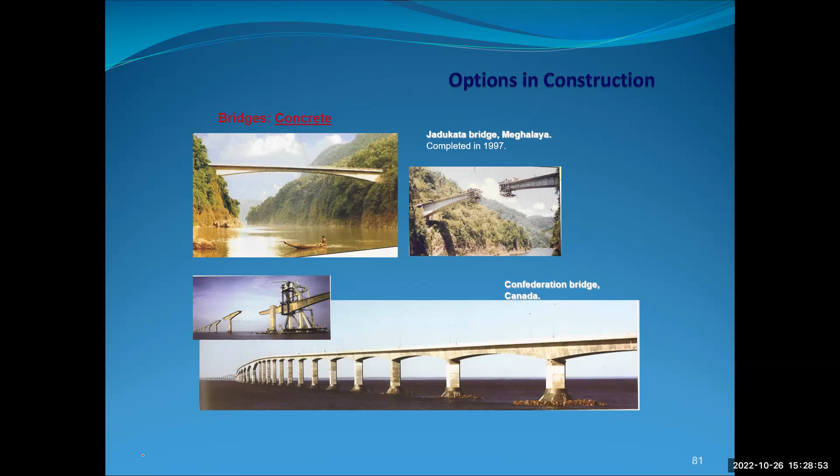Now look at the concrete built here in Sweden and Denmark, the bridge connecting Sweden and Denmark in 1998. Look how proud these people were when they built it. Look how majestic that is. That makes you appreciate concrete.

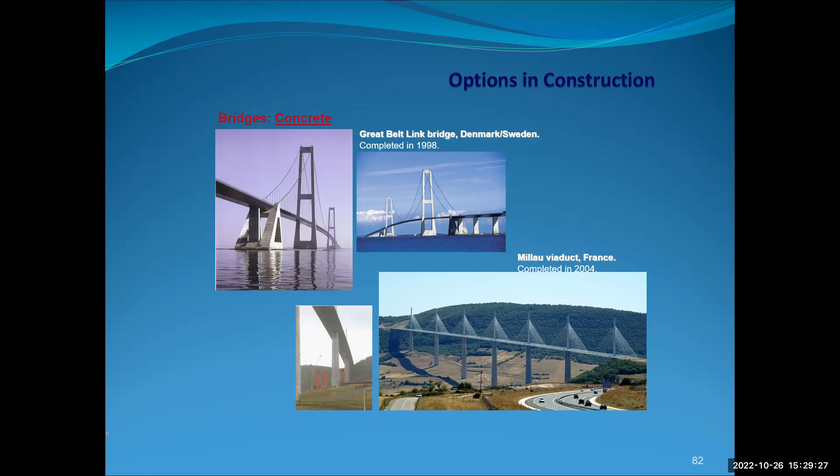In France, there's another one from 2004, this nice good-looking bridge, like somebody suspended it. This is also something that makes people proud to belong to a nation that's able to create and build these mega structures.

Concrete can also be a composite kind of material. You can mix it with steel, or with other materials, to improve the performance or design of the members.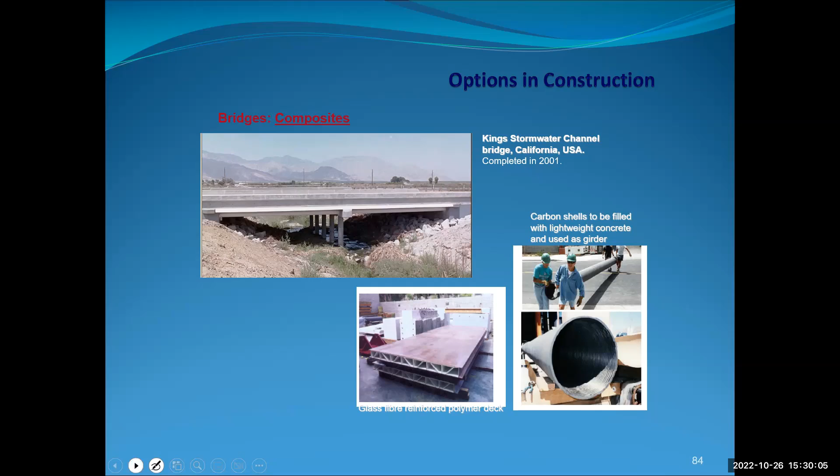Now let's talk about concrete as a material. The new technology, the new majestic material, the man-made rock, by adding water. Just add water, that's it. Have the ingredients, add water, mix it up, and wait not too long, 2-3 hours. You're creating rock, a solid rock at room temperature, no machinery needed. You can mix it by hand. There's an earthy kind of ingredient between cement and aggregate that becomes rock.

Concrete is the second most consumed material on earth after water. Think about this kind of majestic material. Show me any other material, right? Plastic, you need pressure. Steel, you need temperatures in the thousands of degrees Fahrenheit to produce it. But this is nothing - you just put all these ingredients together, anywhere, anytime, any temperature, and you can produce a rock, and build giant structures on this rock.

Not only that, this material is very common. We consume more water than concrete - that's the only thing, and the rest is concrete. Normally, the estimate is that we currently manufacture about 1.7 billion tons per year, approximately 4,000 cubic miles per year. Each person on this planet gets about 1.3 cubic yards per person per year.

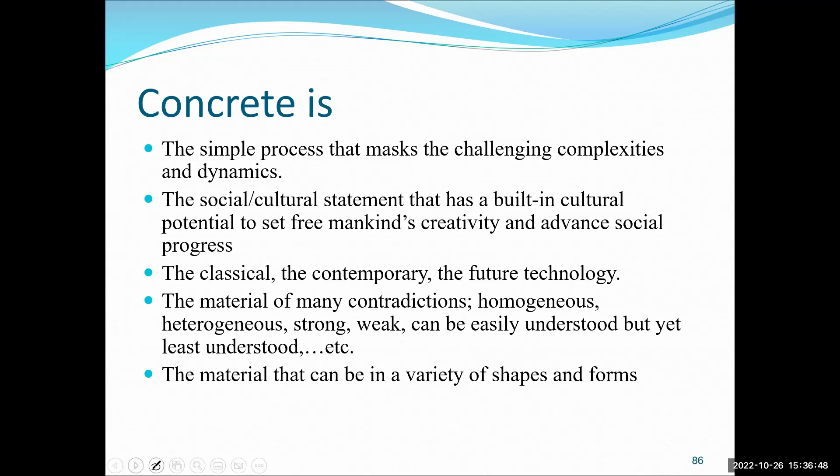Now, here's something you need to remember. In the 20th century, the focus was basically on the chemistry of the cement. Once we discovered Portland cement, we said stop—don't do anything. No one is allowed to change it.

We reached the ultimate kind of magical material, which is Portland cement, and we were not allowed to challenge it or improve it. We thought that we'd reached the maximum—nothing better than Portland cement.

And we exhausted the talents of engineers like you and I, not to come up with a better Portland cement or improve it, but we dedicated those talents toward codification and standardization of this Portland cement.

And if you want to improve it, don't improve the Portland cement itself—come up with a new material to adjust it. That's the biggest mistake. This is the biggest mistake that's been made, and it cost us, in this case, at least 50 years of advancing concrete.

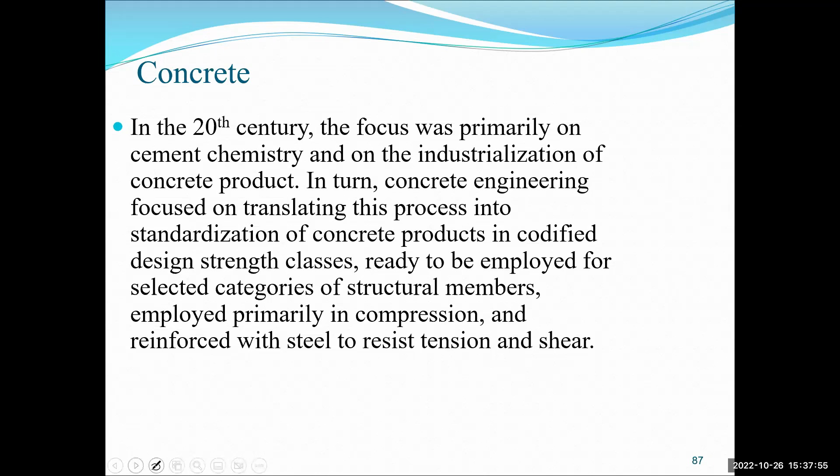You need to remember this is the biggest mistake that we've made, especially the Portland Cement Association. They are guilty of depriving us of improving concrete.

And here it is—in the 1980s, we realized that the problem with the strength limit of concrete comes down to the voids in the concrete itself, and these voids are because of excess water. If we have it very well compacted, then you end up with good concrete.

So we started trying to come up with a new mix, and we reached the point where, yes, if we really compact the concrete materials into a dense form, we can reach a very high strength concrete—as strong as steel when it comes to compression.

And we called the material high strength concrete. Then we called it high performance concrete, which increases stiffness, workability, and strength.

Now here's what happened in the 1990s. I'm not sure if you're a young engineer, probably this is way too far back, but for me it feels like yesterday. We produced concrete we call ultra high performance concrete.

Ultra high performance concrete is basically trying to reduce the void to zero in the concrete.

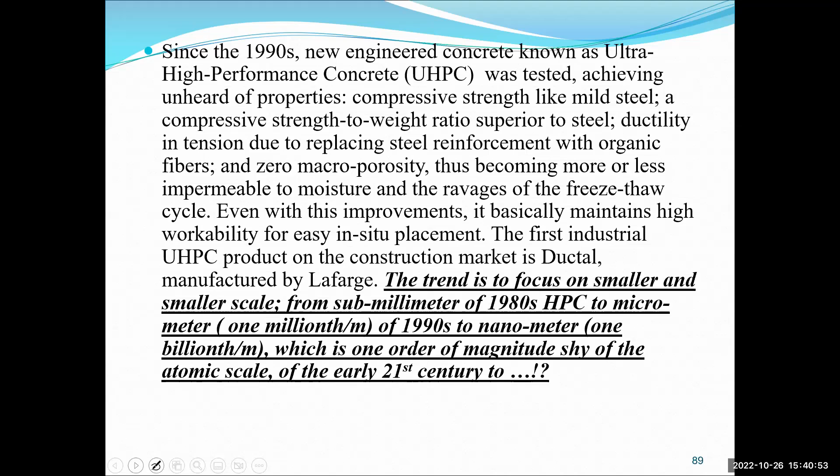So what's the secret? The secret is calcium silica hydrate, CaOH2. This is produced when you add water. Remember when we talked about the water cement ratio? For the hydration process, we needed a ratio of 0.23, but we actually use 0.5.

But this is the new material. We use a water cement ratio equal to 0.11. Now you might say, well, I need 0.23 for hydration. This is the secret: you hydrate half of the cement, which is not Portland cement but the newly produced cement, and then this hydrated half combines with the calcium silica hydrate and continues the chemical reaction. As simple as that. Make sense?

So what does it mean? It means zero excess water. What does it mean? Zero porosity in the concrete. What does it mean? Zero void, or approximately zero void, in the concrete. Make sense? So you hydrate half of the cement, and that half combines with calcium silica hydrate, and that's where the chemical reaction continues.

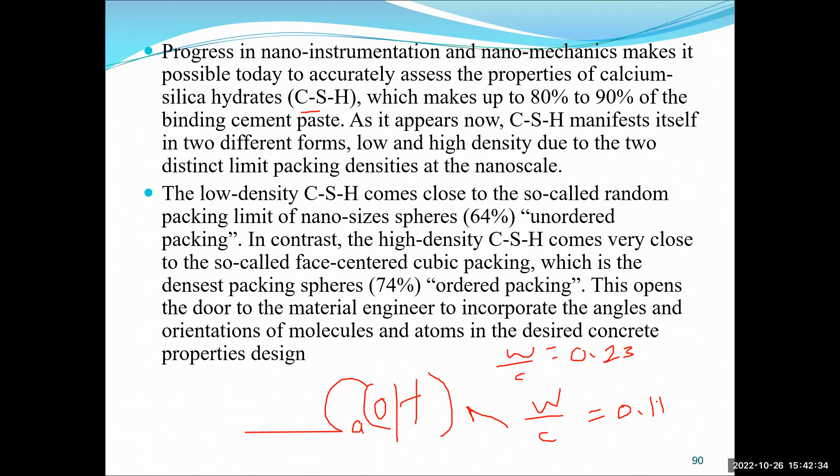So it appears that calcium silicate hydrate manifests itself into two different forms, low and high density. High density gives you higher strength. This is the whole thing behind the new invention of this cement. This is high performance. We call this material ultra high performance fiber reinforced concrete, which uses a special kind of cement, not the cement we normally use.

We use even finer materials, approximately 600 micrometers down to 0.1 micrometer, and a water cement ratio of 0.11, very small. That means there's no excess water for sure. Sometimes we use metal fiber to increase the strength again, and organic fiber for fire protection if the concrete is subject to fire. We can also use admixtures later on. So that's the whole secret.

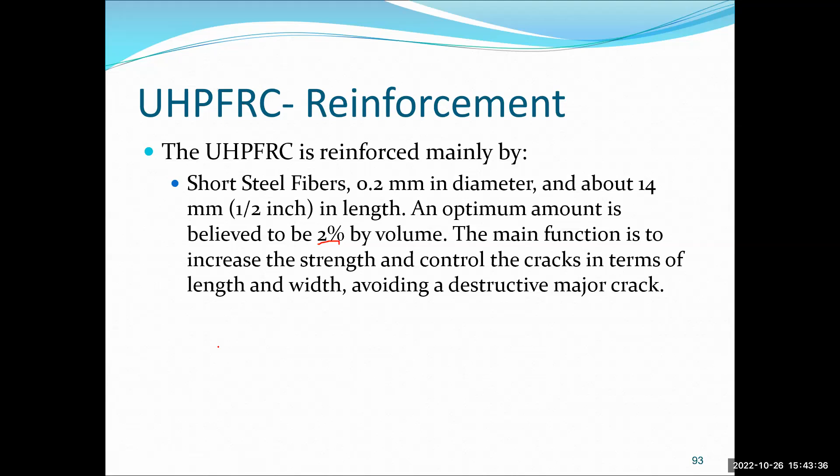Now, for the ultra high performance fiber reinforced concrete, the fibers can be steel fibers with a diameter of 0.2 and a length of approximately half an inch, by volume not too much, about 2%. We also have organic fiber, or prestressed. The main purpose of the organic fiber is to improve ductility without reducing strength—giving some ductility by letting it deflect.

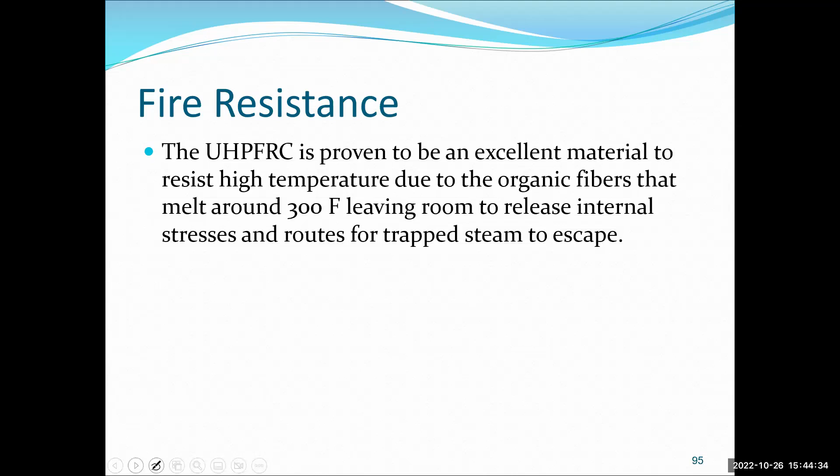So ultra high performance fiber reinforced concrete is proven to be an excellent material, resistant to high temperature due to the organic fiber. The organic fiber in the concrete will evaporate, leaving some space to absorb the steam that comes out during a fire in buildings or structures.

Make sense? That's why the main purpose of the organic fiber is to absorb the steam from fire. So the microstructure of the ultra high performance concrete is completely closed, meaning you do not need air content, and water does not need to penetrate it—it's completely closed. If water doesn't penetrate it, there's no freezing-thawing problem, no excess water, and no shrinkage. This helps improve the chemical stability of the material and resist any kind of chemical attack on the concrete.

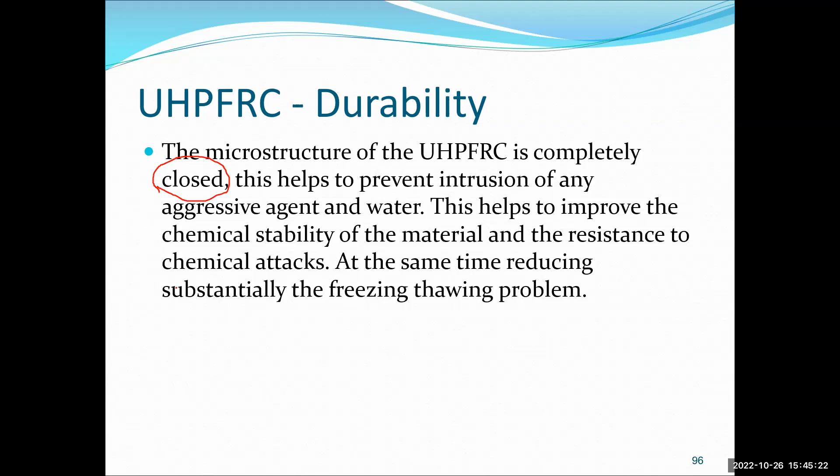At the same time, reducing substantially the freezing-thawing problem. So think about that. This is something that we have to think about.

Now, compressive strength reaches 26 KSI. How much is the allowable strength for A36 steel? 22 KSI. This is for steel, look at that. We exceeded the A36 steel allowable strength. The tensile strength is 1.2 KSI, and the flexion is 5.8 KSI.

And not only that, the most important property that I like is that it does not shrink. If it does not shrink, that means there's no cracks, unlike the traditional concrete made of Portland cement. Now we can say, what happened? These people wasted 50 years, not allowing us to improve on the properties of Portland cement concrete.

But it's been done by the French and German people. Here's some examples to show you.

About the new materials: ultra high performance fiber reinforced concrete is being done in this case in South Korea, a bridge. Look at how thin that is, see how thin that is? It's extremely thin, less than an inch, and it's a pedestrian bridge. It looks very pretty, and it is very efficient.

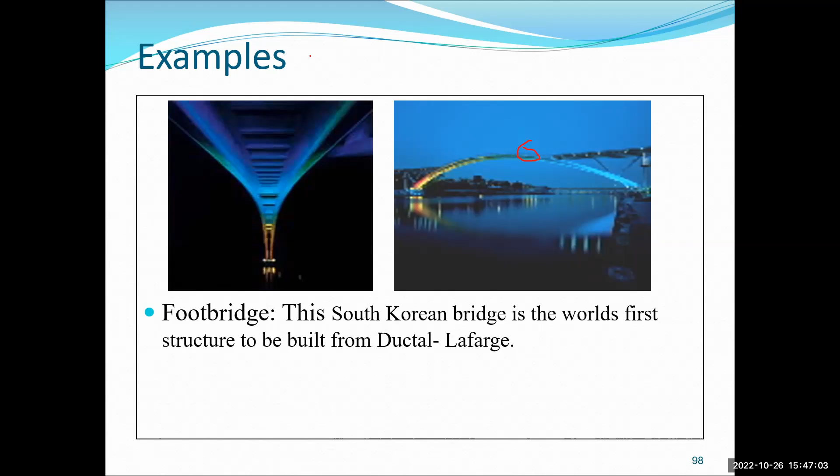Footbridge. Only 5 countries are allowed to produce this kind of cement: the United States, Germany, and France, among them. And if you want to build anything from these materials, you have to bring the people with the materials to build it for you. They are not going to let you get the materials by yourself and do it, because this is still top secret.

There's other additional footbridges, and that's it. You can see how pretty that is.

And in the United States, what we did is we had some collaboration with MIT. We are the first people to produce a bridge open for traffic, and that is in Washington, D.C., with the collaboration of MIT. The bridge is about 21 meters, about 60 feet, and approximately about 9 feet wide.

So it is because it's still at the beginning. We don't believe what we're seeing. We don't believe that we really get that kind of strength, that kind of power, in the concrete. So we do not believe it, so we're still cautious of using this material. We were very cautious to use this kind of material.

Now it can be also transparent, and the best you can see is this kind of beam. You cannot make a beam deflect with Portland cement. Look how the deflection is here, look at the deflection, you see it? It deflects, but there's no cracks. It's flexible, it is high strength, it looks like steel, it behaves like steel, but at the same time it's concrete.

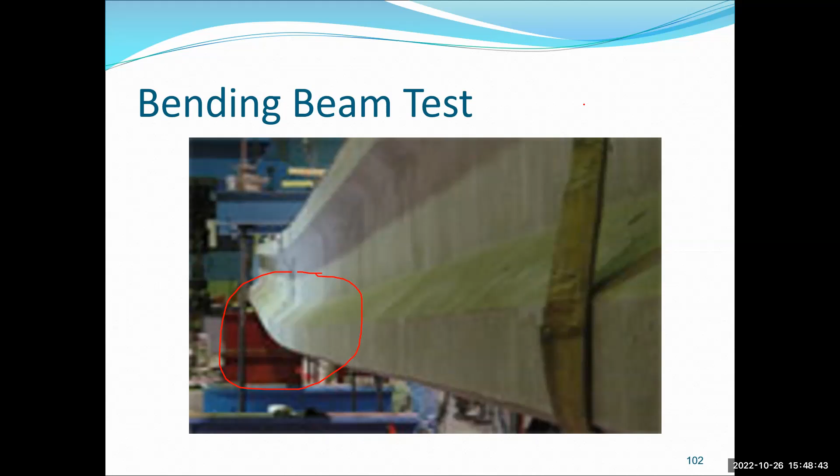It doesn't have this kind of disadvantage of steel. That is one of the best pictures you can keep in your memory about this kind of material. That is the best performance of that kind of material: it deflects, but there's no snapping in this case.

Also in New York, we use ultra high performance fiber reinforced concrete to make chairs. So chairs made of concrete like this, you can see how thin that is, how thin that material is. And that is, you can make furniture, you can make surgical equipment made of this kind of material.

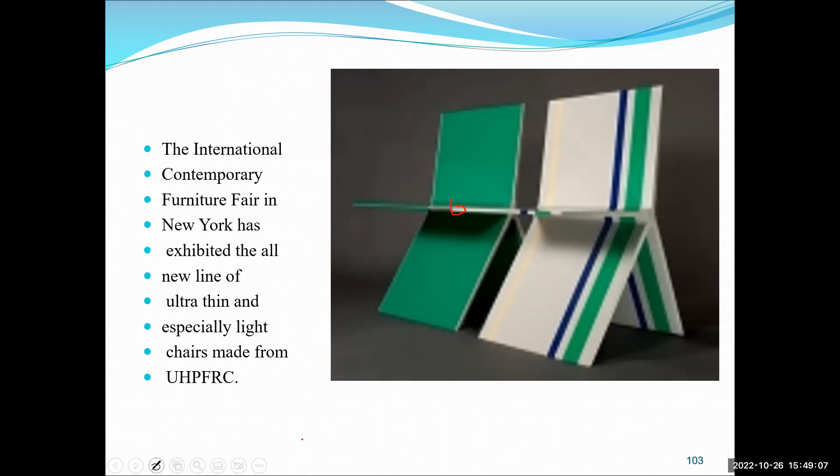And here in Canada, Calgary, we use it for an LRT station over there. And the thickness is less than an inch, 20 millimeters. See how powerful that is. It's a concrete, it's not a steel plate. It's a concrete with high strength, using ultra high performance fiber reinforced concrete.

The performance of this material is still top secret. We do not really have widespread use. We are very careful to use it because we are still trying to understand the impact of this in the long run. That's why we're still studying it, we're still improving it, but we use it every now and then, and that's one of the uses we have for this kind of powerful material.

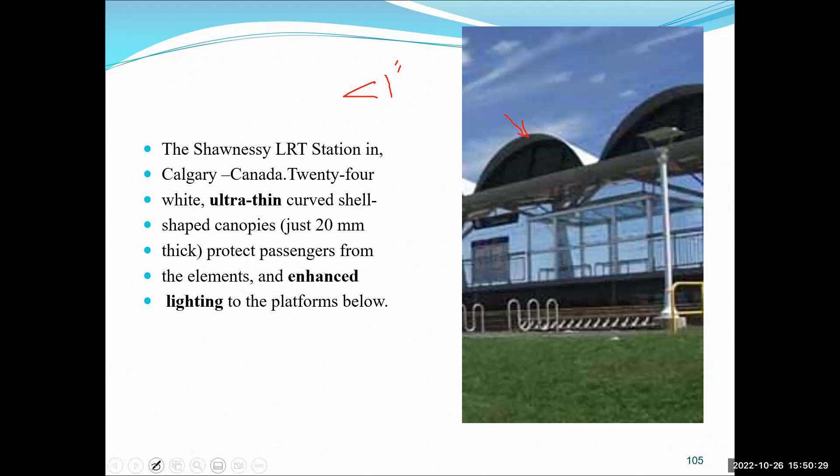With this, we reach the end of this webinar.